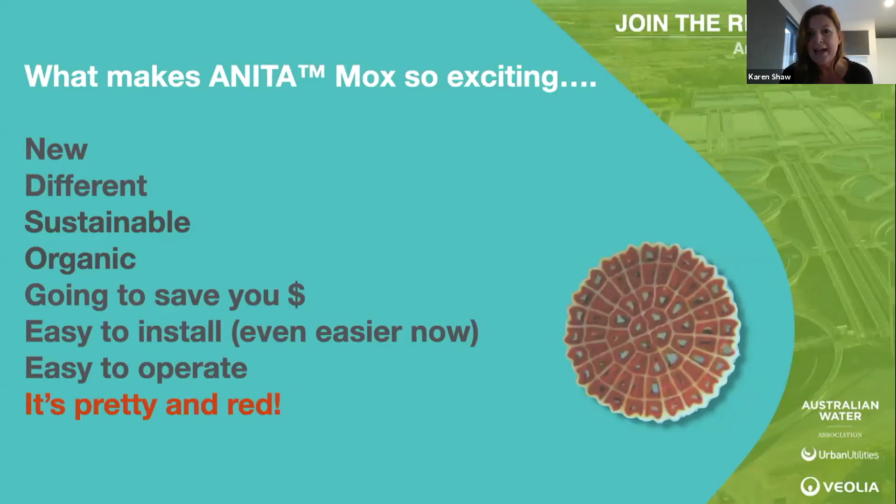Okay, good morning everyone. I'm in Europe, so it's early morning for my part. I'm going to introduce you to the technology. But first, we'll talk a bit about Anammox itself and introduce you to the topic before jumping into the process itself.

So let's start with what is ANITAMox, and before that, which is the Veolia process, what is Anammox in general? If we look at the wastewater treatment plant, we can see a general layout with your water line at the top and then your sludge line at the bottom. What we can see is when we start having digestion, when we want to make use of all the solids generated through your wastewater treatment plant, we generate what we call the side stream after the dewatering. And this side stream is very little flow, 0.5 to 1% of the inlet flow of your plant, but represents 10 to 20% of your nitrogen load, which is significant.

Ammonia concentration is usually quite high, and COD is very low, as we've made biogas out of it in the digester, so the carbon left is little. It's even worse, or more nitrogen, when we add THP, thermal hydrolysis, which is quite popular now in Europe, the US, and also Australia. This will just strengthen the side stream with even more nitrogen return, up to 30% of your inlet nitrogen coming through that side stream.

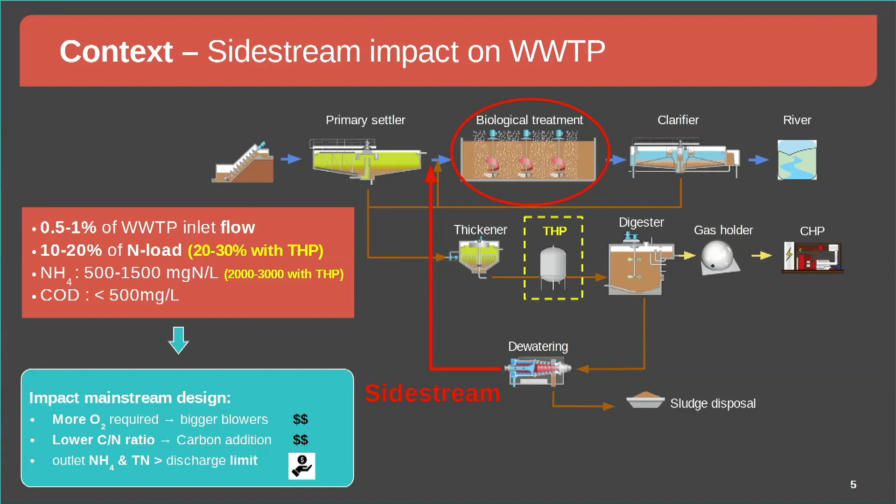The impact of that return is basically, in a biological treatment line, you're going to require more oxygen to nitrify that nitrogen load, so a bigger blower. You're also going to return mostly nitrogen and little COD, so you unbalance your C/N ratio. For the denitrification, you might end up having to add carbon into your system. And then you might put at risk your outlet ammonia and TN discharge limit, and maybe get fined, or not be compliant all the time. That's why we developed this ANITAMox process, to fit into that reject water, that side stream, and to treat nitrogen directly in the stream before it is recycled or returned back to the main plant.

So ANITAMox is the name of the Veolia technology using the Anammox technology.

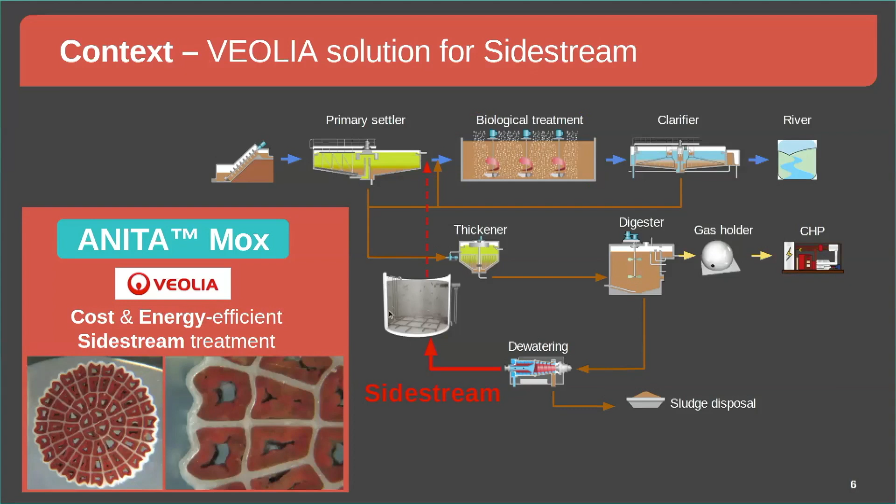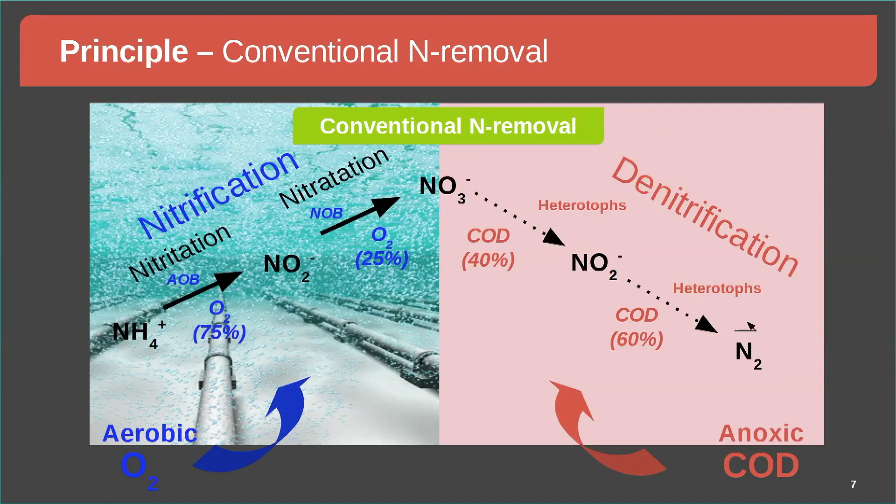With the Anammox, the beauty is we can reduce the oxygen need, and we don't need any carbon, any source of COD. So now we only need to nitrify to nitrite, NO2, not all the way to nitrate, but only a fraction of the ammonia, around 50-55%. Then with the nitrite and the remaining ammonia, the Anammox bacteria will convert that to nitrogen gas through denitrification, with no external carbon required—which is really good for centrate because they don't have any COD. So we can have full nitrogen removal without the need of carbon. It does produce a bit of nitrate, NO3, around 10% stoichiometric, so you will see a bit of nitrate in your plant, produced directly by the Anammox.

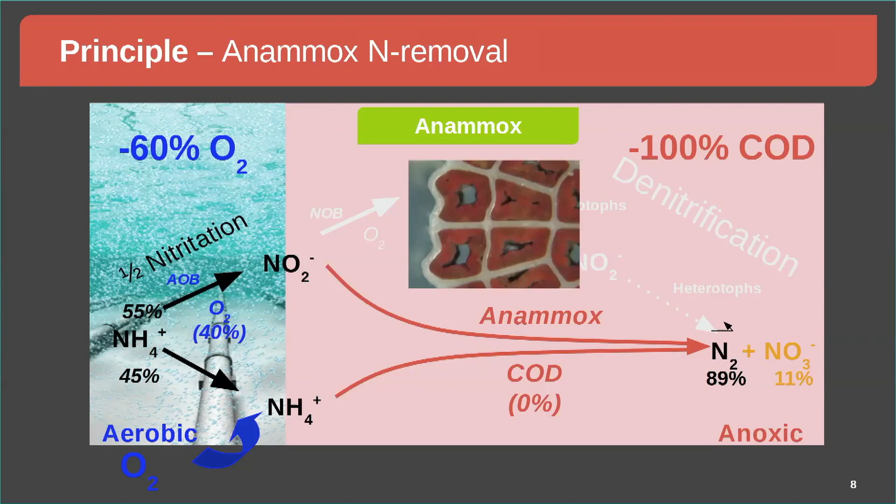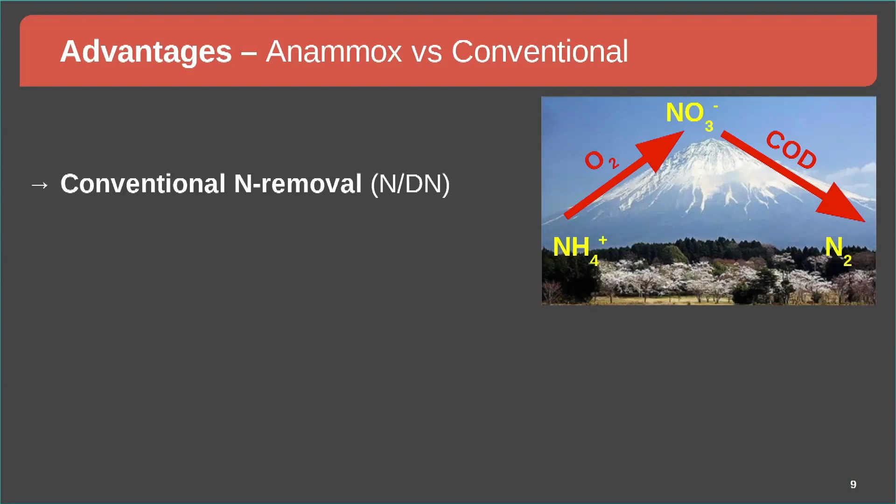To summarize the advantage of Anammox compared to conventional N removal with nitrification and denitrification: conventional N removal is a big slope to climb with oxygen, needing a lot of oxygen to convert all the ammonia to nitrate, then downhill needing a lot of COD to denitrify down to N2. With Anammox it's different—the mountain is smaller, more like Mount Fuji versus Uluru. We need only a tiny bit of oxygen because we only nitrify a portion of the ammonia, and only to nitrite, not all the way to nitrate. Then with the leftover ammonia, we go all the way to N2 with no COD.

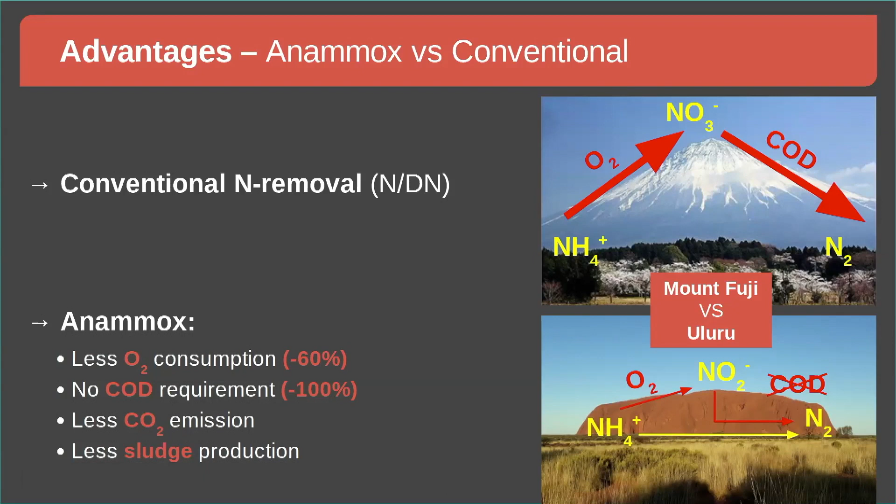So the advantages are: less oxygen consumption, a stoichiometric minus 60% saving, no COD requirement so we don't need to add any carbon, and there's no carbon in that type of centrate. Obviously less CO2 emission since we don't add external carbon, less energy used for aeration, and less sludge production because that bacteria is a slow grower, and we don't use heterotrophic bacteria for denitrification, which produces a lot of sludge.

There's always some challenges, and a reason we haven't seen Anammox before in normal plants. First, it's a very slow grower. If we compare the main populations in a wastewater treatment plant: COD removal is done by heterotrophs with a doubling time of around an hour, a couple hours. For nitrification, the nitrifiers are slow growers—it takes around a day or two to double, based on conditions. For Anammox bacteria, we're talking about a week. So the order of magnitude tells you this bacteria needs the right conditions and the right retention mechanism to stay in the system.

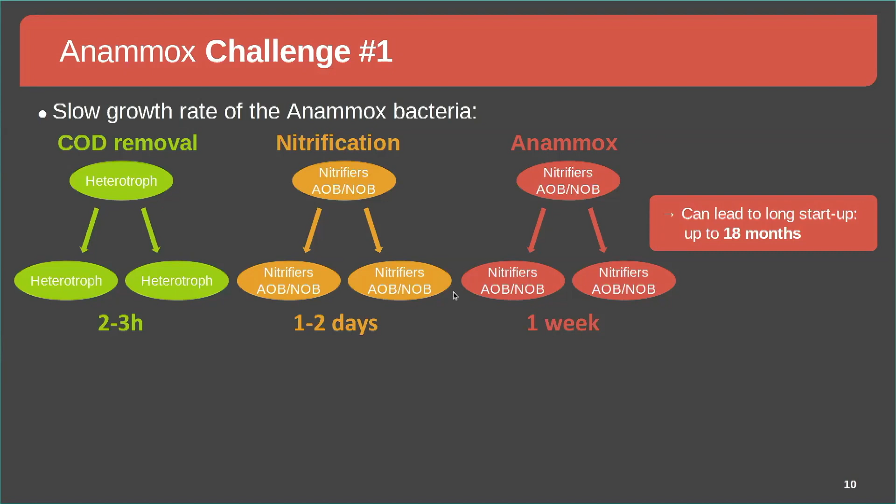This slow growth rate can lead to long startup times. We developed a special strategy at Veolia called BioFarm, where we pre-seed the system with some Anammox so we can start up quicker and get up and running faster. We can reduce the startup time down to 3 to 4 months depending on the project. But keep in mind, these are slow growers, so we need to give the right conditions and the right retention of the bacteria in the system.

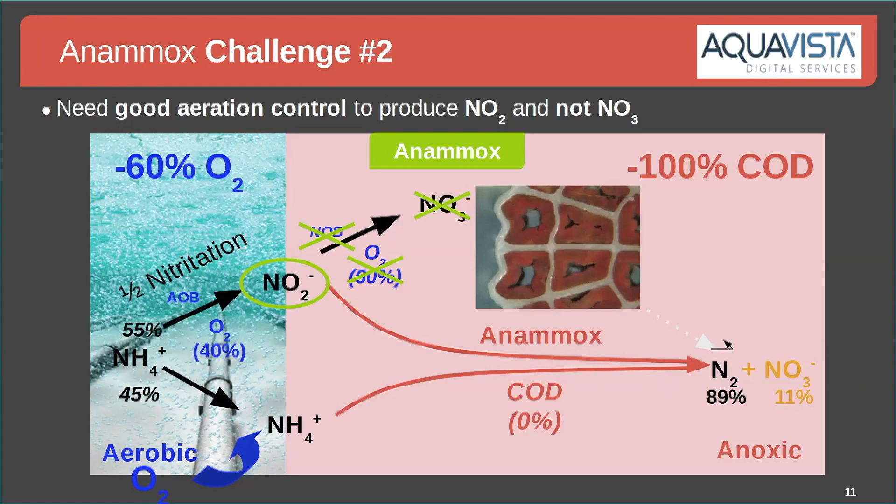Challenge number two with Anammox technology is the key substrate, nitrite, NO2. We need to make sure all or a portion of the ammonia goes to nitrite, but not all the way to nitrate—if it's nitrate, Anammox can't do anything with it. To keep it at the nitrite level, we need to make sure NOB bacteria, which oxidize nitrite to nitrate, are suppressed or their growth is controlled. We need very good aeration control to produce nitrite and not nitrate—that's key for Anammox. We need a bit of aeration for the nitrification stage, but not too much, since Anammox doesn't like oxygen. It's a very sensitive parameter, so we use advanced aeration control through our Aquavista digital services, which allows our Anammox process, the ANITAMox, to mostly produce nitrite and avoid going all the way to nitrate.

So that's the background of the Anammox. Let's jump into the ANITAMox process now, the Veolia process.

It's based on the MBBR technology that some of you might have heard before, moving bed biofilm reactor, from AnoxKaldnes, who are the leader in that technology and part of the Veolia family for many years now, based in Sweden.

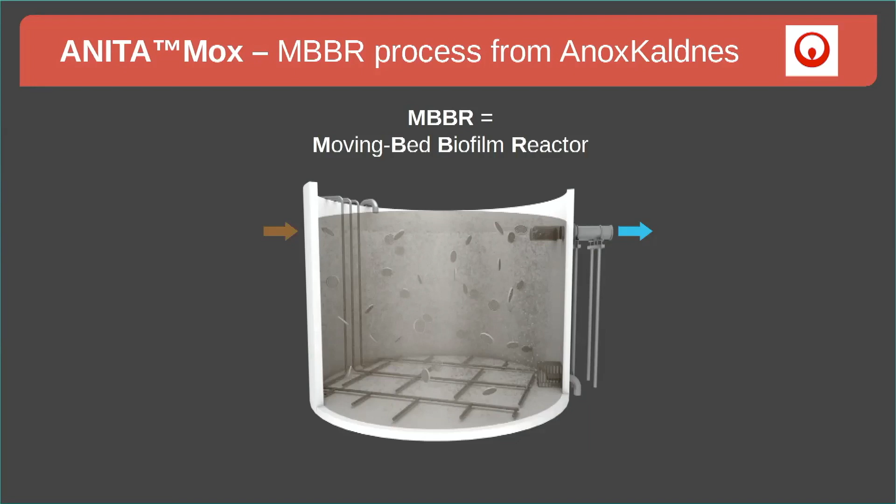The MBBR technology is very basic. One tank, water coming in, coming out, no sludge edge, because we're using a biofilm technology. The key component of MBBR is the media, the plastic media, where the biofilm can grow on different types of media based on the type of project.

You have a sieve to retain the media, the plastic media, but the water can go through in the outlet. It's a physical barrier for the biofilm to stay in the tank. And finally, we have an aeration system, or mixing system when it's anoxic, but in our case we need aeration - stainless steel, robust, coarse bubble, but we can also use fine bubble for some projects and for the ANITAMox as well. Usually it's a robust aeration system.

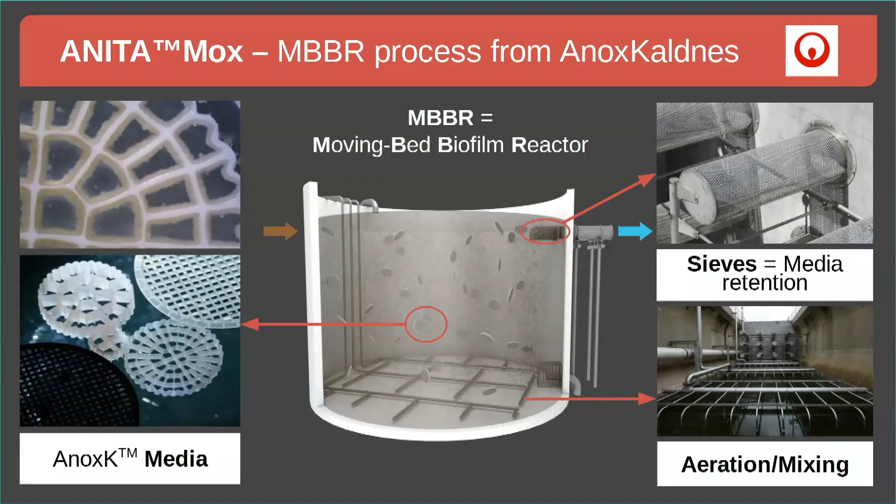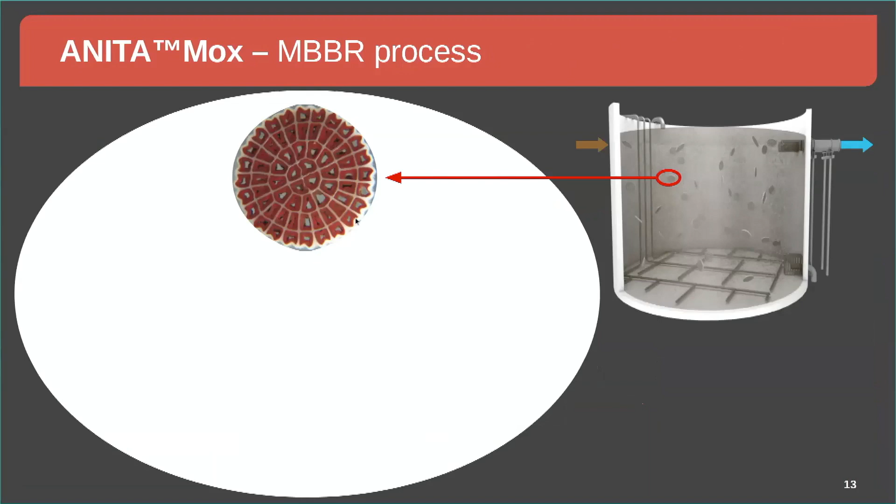Now looking into the detailed mechanism of the ANITAMox. So as I told you, it's an MBBR process, but if we zoom into what happens on the biofilm, you see a picture of a K5 carrier with Anammox bacteria, with that red specific color on it. If we zoom into a little square, here we go: we have the media, the plastic media in dark, then the biofilm growing on top, and the liquid, the bulk liquid, around it.

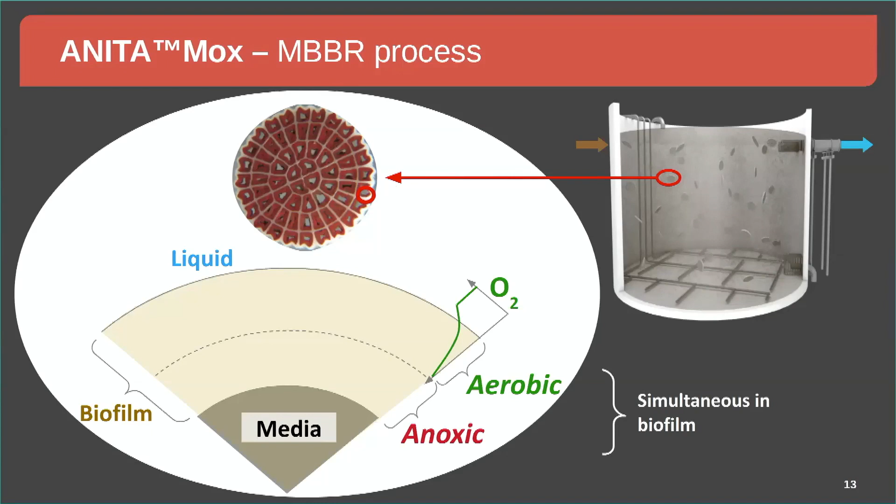If we apply some oxygen gradient, we're going to create simultaneously in the biofilm an aerobic layer on the outer layer of the biofilm, and deep in the biofilm we're going to have anoxic conditions with no oxygen. That's why it's key to control oxygen - we want enough aerobic zone for the nitrification, but not having the oxygen penetrate fully through the biofilm, so we leave that anoxic layer deep in the biofilm for the Anammox.

So what happens after with ammonia? Ammonia in the bulk will diffuse into the biofilm and be used by the nitrification, the AOB bacteria, the nitrifiers, on the outer layer of the biofilm using oxygen. Then the produced nitrite and leftover ammonia will diffuse further into the biofilm, and the Anammox will be located deep inside where oxygen is not present. The Anammox will finish the job, converting nitrite and ammonia into nitrogen gas.

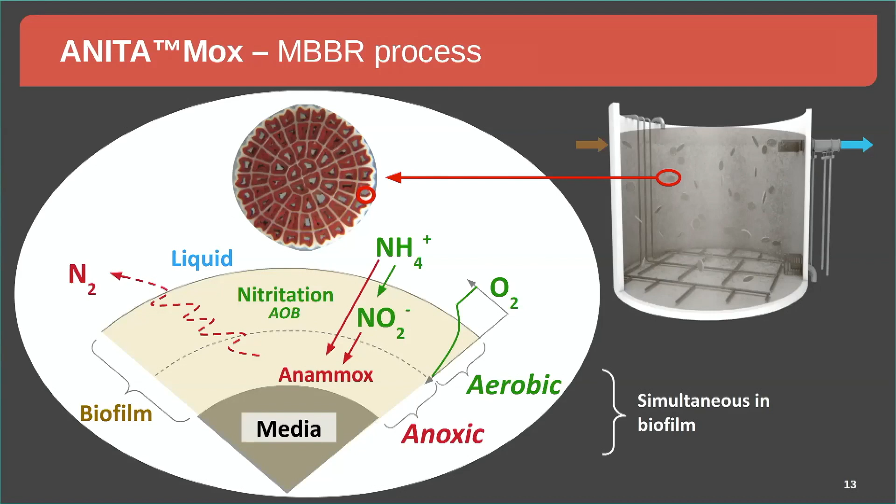So that's what happens in reality in this ANITAMox process on the biofilm - all that happening simultaneously in the biofilm.

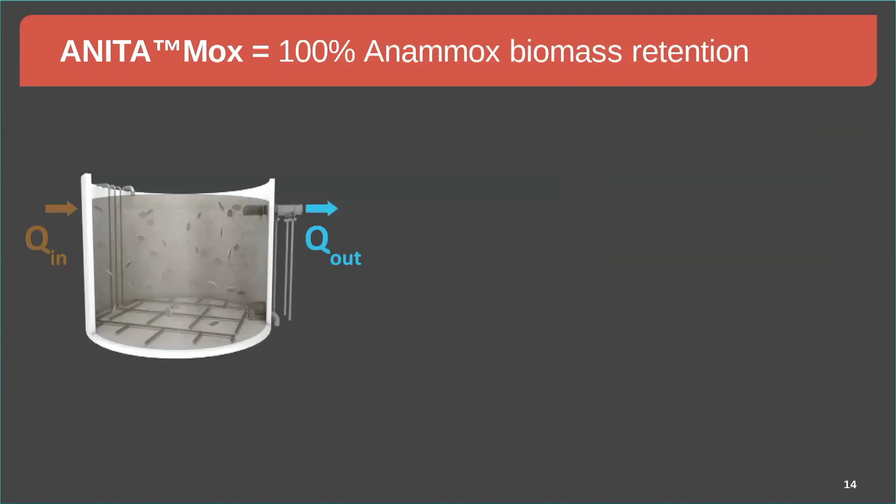Another big advantage of using this technology for the Anammox process is the combination of the media and the sieve, meaning we have no risk of losing the biofilm and the Anammox from the system. This is key, as I told you, it's a very slow grower, so we need to make sure that we retain most of the bacteria in the system and we're not losing the Anammox through the system.

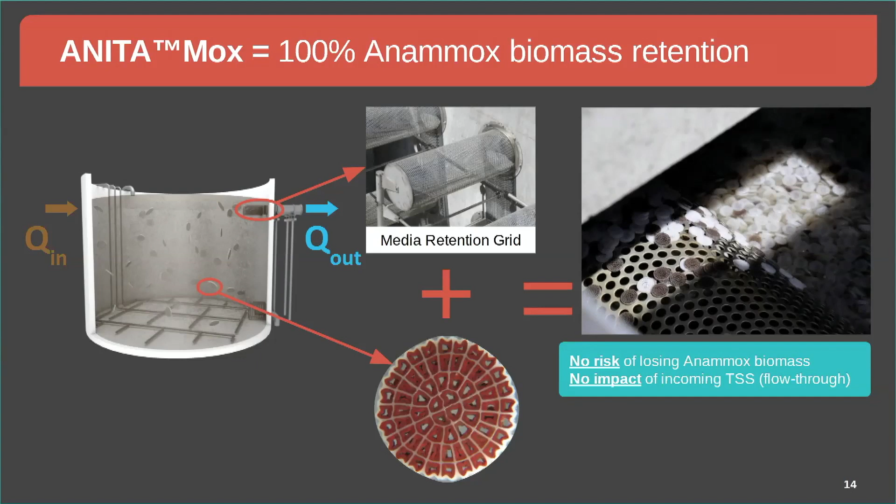The other good thing about that is when you have a lot of TSS coming in, which can happen when we operate a centrifuge on digested sludge. We know all that, but as an operator - and Veolia operates many plants, it's not just a technology provider, it's also a plant operator - sometimes TSS can go very high in a short time period when we start a centrifuge, for example. In the case of the ANITAMox, all the TSS coming in will come out through the sieve, and we have no interference between the TSS and the media. So that's a really good thing when you have a big flush of TSS - it will go through the system nicely.

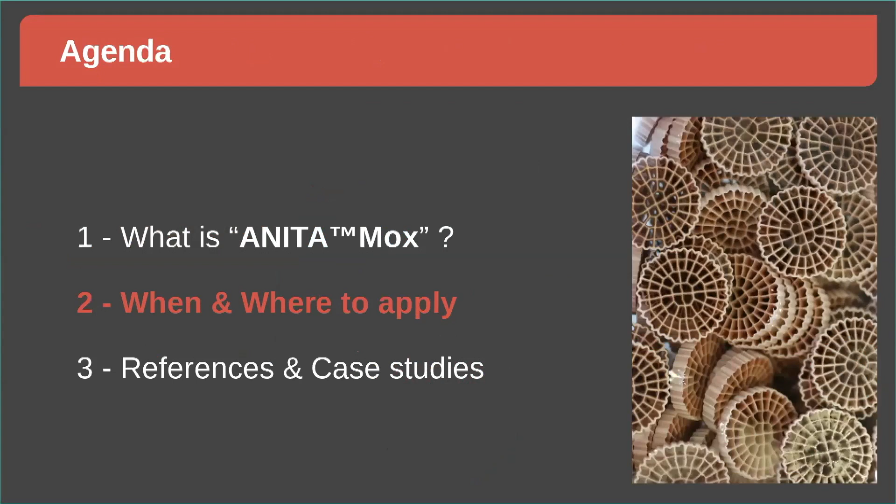So that's the background of the Anammox and the ANITAMox process. Now I'm going to show you when and where to apply this technology, where are the sweet spots.

We've been talking about that MBBR configuration so far, pure MBBR, what's coming, comes out, no sludge recirculation. We are targeting side stream, with SBCOD, a barbarous name, but it's soluble biodegradable COD to ammonia ratio. This is a key parameter to follow in your side stream or reject water or effluent you want to treat with Anammox. If it's relatively low, so we don't have a lot of carbon compared to ammonia,

we use this pure MBBR configuration I've just explained. Conventional anaerobic digester, reject water, no problem. Some industrial effluent as well.

Am I losing the sound or no? Hope you can still hear me. We can still hear you. Yes, Romain. Okay, cool. Sorry, I had a strange noise in my headphone. Just wanted to make sure I was not talking alone.

So some industrial effluent I was telling you, it's compatible with high TSS, as I told you, coming in, very robust and easy to operate. Single tank, what's coming, comes out, and it's most of our references so far.

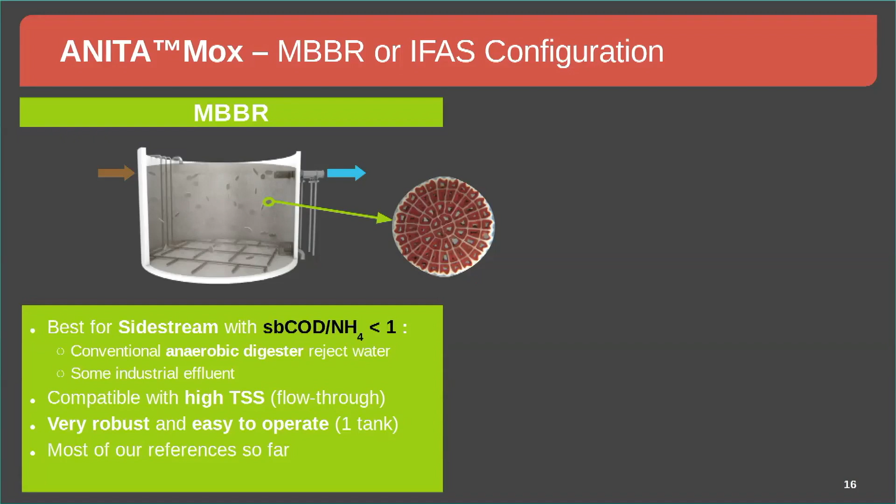We also have an IFAS solution. IFAS is like MBBR, but in the back end, we put a clarifier to return some of the sludge. At the end, we have a mixed hybrid system with media in the tank, but also some suspended sludge, normal activated sludge, which is recycled. So we have a mixture of suspended sludge and the biofilm with the Anammox.

We use this hybrid configuration when this soluble COD to N ratio is higher, when your side stream's got more carbon than usual. Typically we use this configuration when you have a THP, thermal hydrolysis process, as a pretreatment before your digester, because you usually have more VFA, more COD coming out from the digestion. Also for co-digestion systems, when we have a lot of different waste, not just municipal sludge, we use this IFAS configuration.

So it is a bit more impacted by TSS coming in. We need to be a bit more careful on how we operate the centrifuge or the dewatering, because now we recycle the sludge. If we have a lot of sludge coming in, TSS, then it will accumulate in the system. But it's more compact than the MBBR version. So if we have a problem of footprint or reusing a small tank, sometimes we can go for IFAS instead of MBBR.

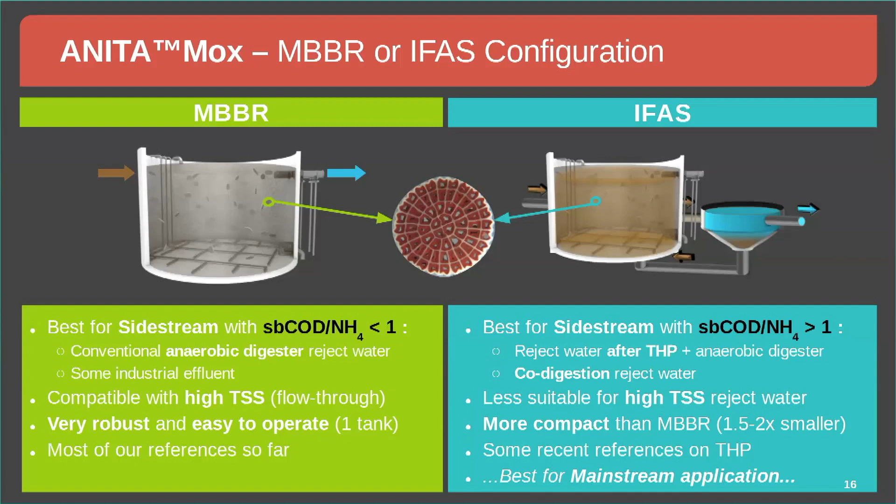So a little slide, not just to highlight the THP reject water, because it's quite specific, and it's been reported that it can be inhibitory. It's a challenging type of reject water to treat when we have THP.

Just to highlight the risk mitigation and how we address the risk with the ANITAMox. The main risk that people know when treating THP with the Anammox system is inhibition of the AOB, the nitrifier, and the Anammox, due to the specificity of this thermal hydrolysis pretreatment. We also have a negative impact of some refractory COD, or some biodegradable COD like VFA, which is higher in that type of centrate, on the Anammox development. So we have a competition between the Anammox and the normal heterotroph bacteria. This can lead to the loss of the Anammox from the system.

So we need to have something which retains the Anammox well. And we can have a bit higher risk also of development of the unwanted nitrifier, the one going from nitrite all the way to nitrate. So these are the four main risks when we are dealing with THP.

So now to show you what we have for those risks as a contingency with the ANITAMox. For inhibition, we always provide flexible extra dilution capacity, up to 2 volumes of dilution for 1 volume of centrate. Usually we are at 1:1 or 1.5 to 1. We can go up to 2 if there is a problem of inhibition.

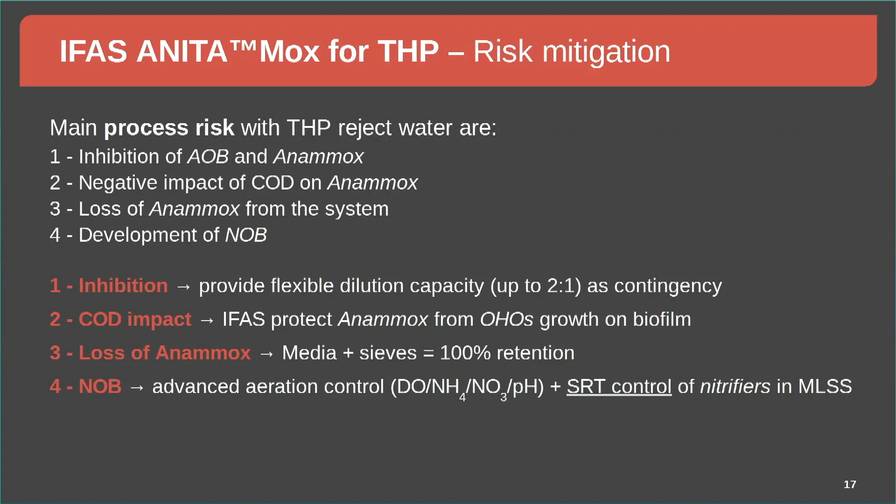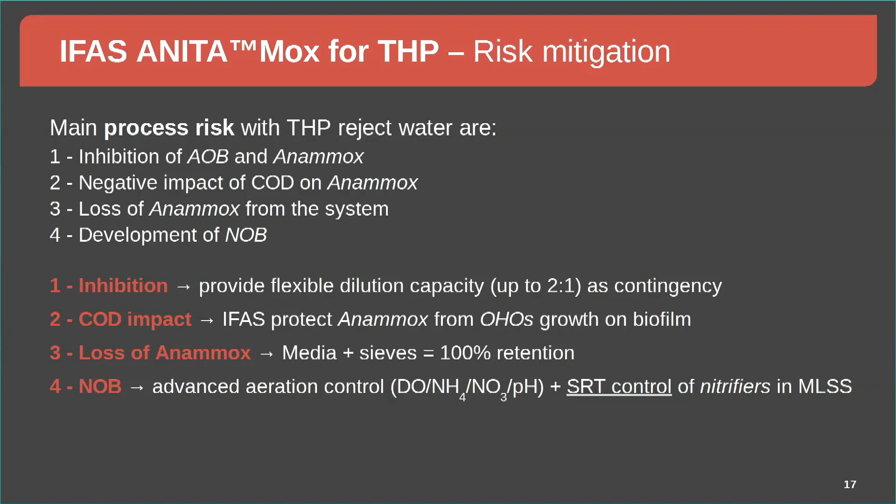And for the NOB, to control the NOB, we have an advanced control aeration system using DO, online ammonia, online nitrate, and online pH, with all the set points being adjusted based on the performance of the system. When you use IFAS configuration, an extra knob to control the NOBs is the SRT, the sludge age of the bulk liquid. We can control that with the IFAS configuration to make sure the NOBs are not growing too much in the system.

So to conclude on THP, just keep in mind that Veolia is not just an AnammoX provider technology, but it's also the only AnammoX provider technology which has a lot of experience with THP. More than 20 years, we've developed our own THP processes called Biothelys and Exelys. We are operating many THP plants, and that expertise has been put into the ANITAMox to make sure that we know how to deal with this difficult centrate at times.

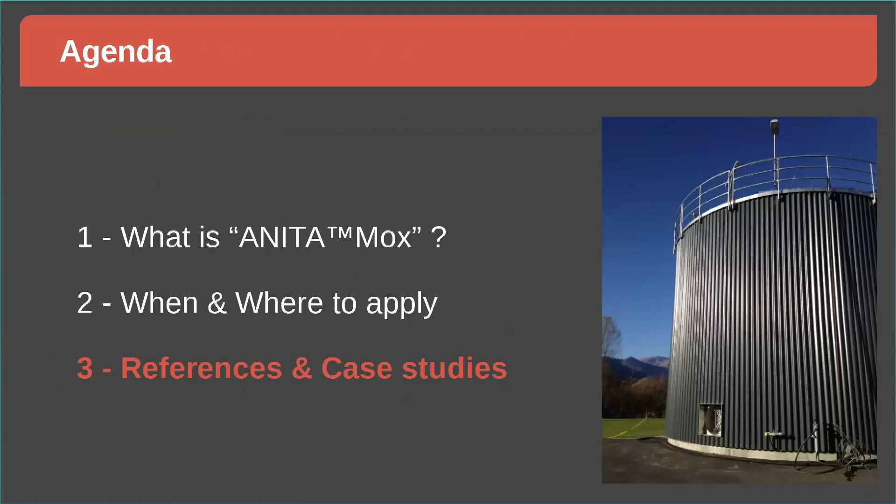So finally, before leaving the floor to Justin to talk to you about the Luggage Point project with the ANITAMox, a few other references and case studies worldwide. This is the reference list. Don't spend too much time reading it, but in green you have the ones which are already in operation, up and running, starting in 2010 for the first one in Sweden.

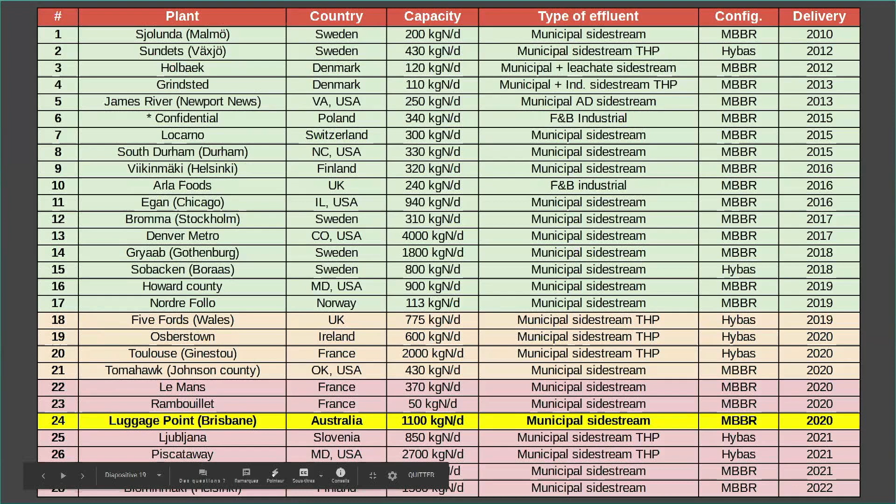In gray, or sorry, in orange in the middle, four which are currently under startup. And in red, the last six, they are the ones which are in design phase or will be starting up later on. We can see in yellow the one in Australia, in Brisbane, at Luggage Point. Mostly municipal, a few industrial references as well, and most in MBBR configuration, but some also in IFAS configuration.

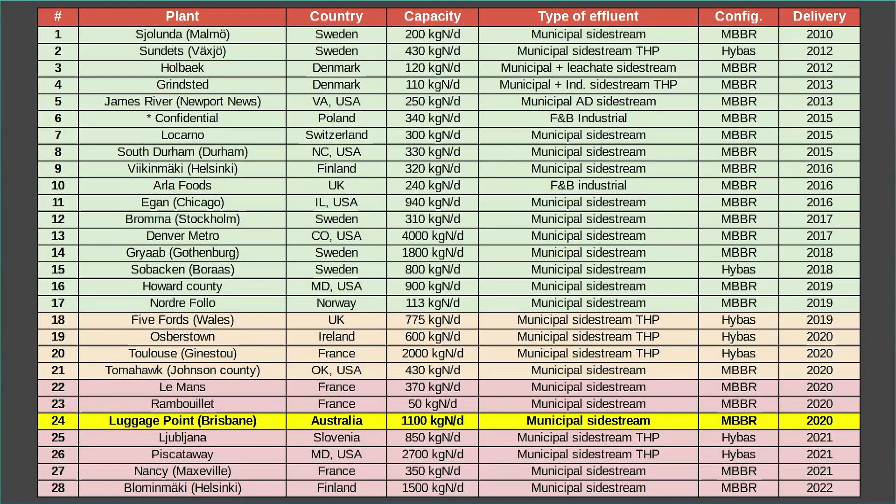If we look at where it's located worldwide, mostly in Europe, 20 plants are in Europe, 5 in Sweden with our colleagues at AnoxKaldnes, 4 in France, then a bit scattered all over Europe. It's been really successful in the US as well. So AnammoX crossed over the Atlantic to the US, and it's a very mature technology over there, and all the utilities in the US are embracing the AnammoX technology.

So we have 7 references in the US, and now AnammoX has lately been doing its longer journey to Australia and to Brisbane. So that's been really exciting actually to be there now.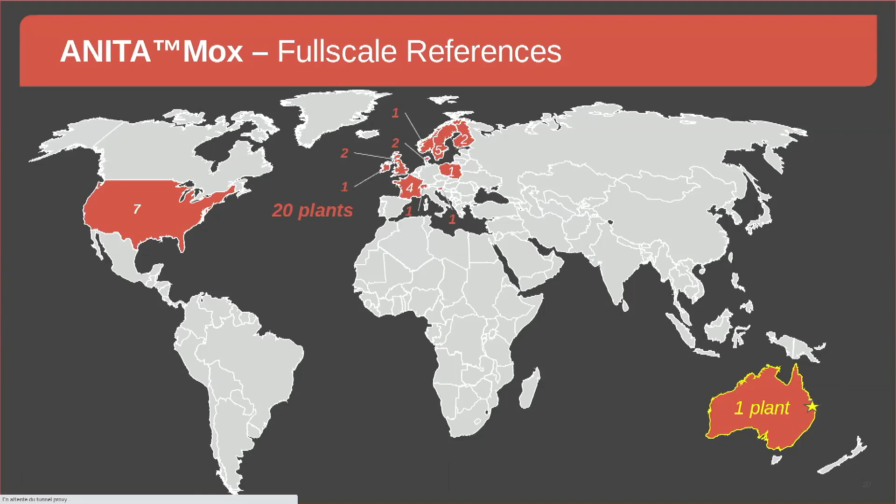So Denver, just a few shots of some of the references. In Denver, it's the biggest ANITAMox so far, treating 4 tons of nitrogen per day. So it's a very big plant in Denver, about 2 million PE. And you see the photo shot of that plant, and the ANITAMox is basically reusing some of the existing tank, just at the bottom here.

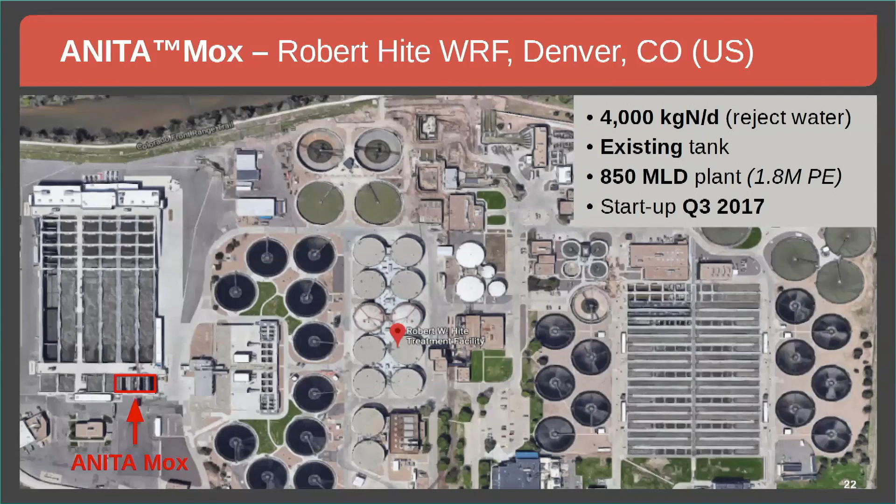The MBBR technology is very good for retrofitting existing tankage you can have on site. We just need a basin of whatever geometric shape, basically. So if we look at Denver, that's how it looks like. A few Photoshop images of the plant we retrofitted. You see the empty plant with the sieve, which was located, the aeration grid, and some mixers.

Two side-by-side reactors. The only specificity of this project is that alkalinity was low, much lower than normal centrate, because they're using ferric to dewater. So we have some consumption of alkalinity, meaning that without dosing extra alkalinity, which we don't have in most reject water, but in that plant because it's limiting, we can't reach more than 75% ammonia removal, and the ammonia in the outlet stays relatively high, around 250, 300 for this project.

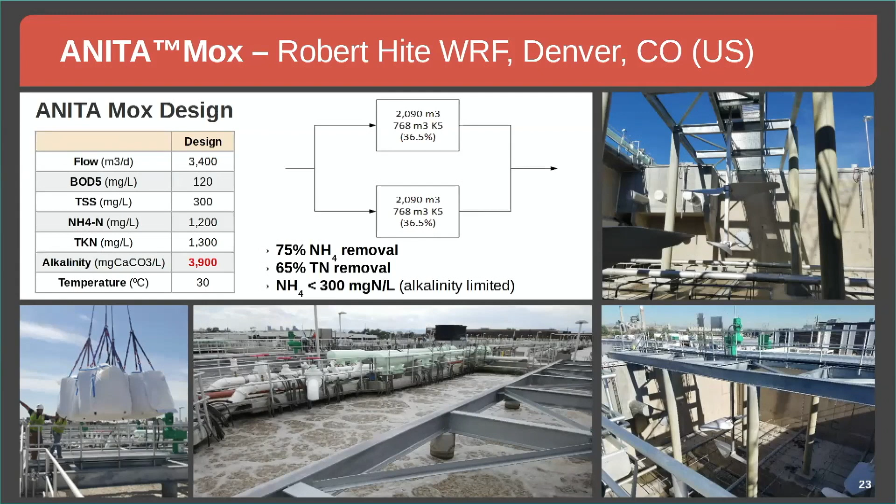If we look at this graph from the client, from the operator: in blue you have the load, so you see the ramp up over 3 months time. But in 3 months time, we've been able to start treating the design load of 4 tons per day by putting only 5% of the media which were seeded with AnammoX. So it was a very quick startup for an Anammox process.

So in blue we can see now we are at the design load, and in red it's the ammonia in the outlet, and we can see that we are quite high, much higher than what we usually see, around 100 to 150. But it is due to the lack of alkalinity. It's okay for the client to be around that level. They don't want to dose any extra alkalinity, so we do with what we have.

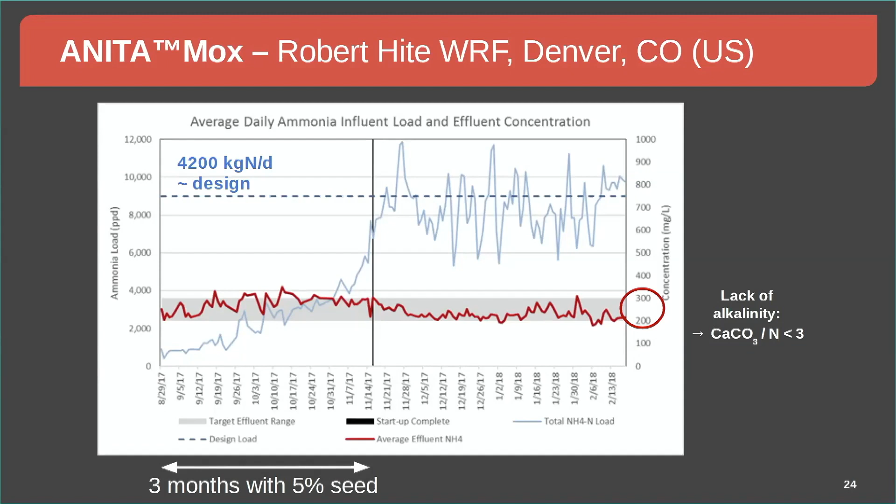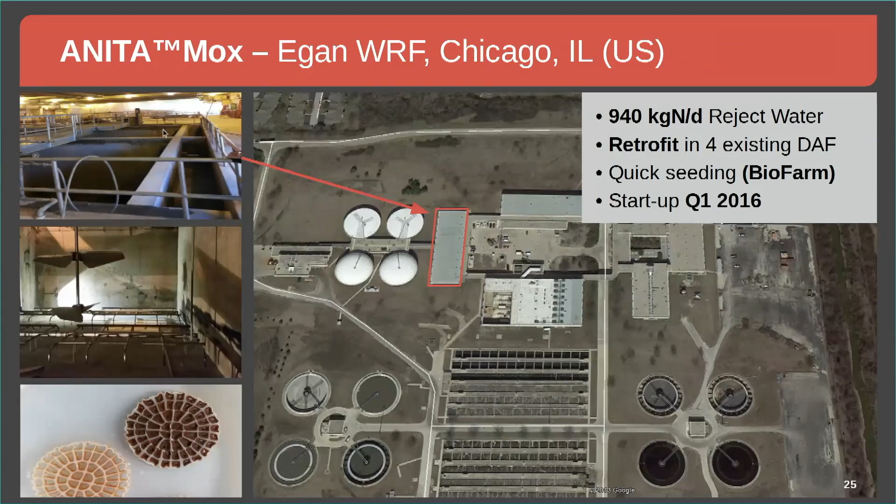Again, in Chicago, again, retrofit of existing tankage. This time, it was unused DAF, so we retrofitted 4 DAF into AnitaMox. You can see some photos there.

The good thing about this EGAN plant is you see the load in blue, the ramp up. We start the ramp up, and after 1 month the client says, sorry, I've got a problem with my digester, we have to shut down everything. We have to put the digester into maintenance and do some operation. So basically we had almost no flow for 8 months, nothing.

But the bacteria, the Anammox, the seed were there. And when we restarted after 8 months, the ramp up was really quick again to reach the design load of around 1,000 kilograms per day. Those Anammox are very resilient. Once they're on the media, they can stay there happily, and we've stored them for more than 2 years. When we restart, the activity is still there. So it's very resilient once you have the Anammox on the media. You can see in the graph the ammonia removal being around 85 to 90% on that plant.

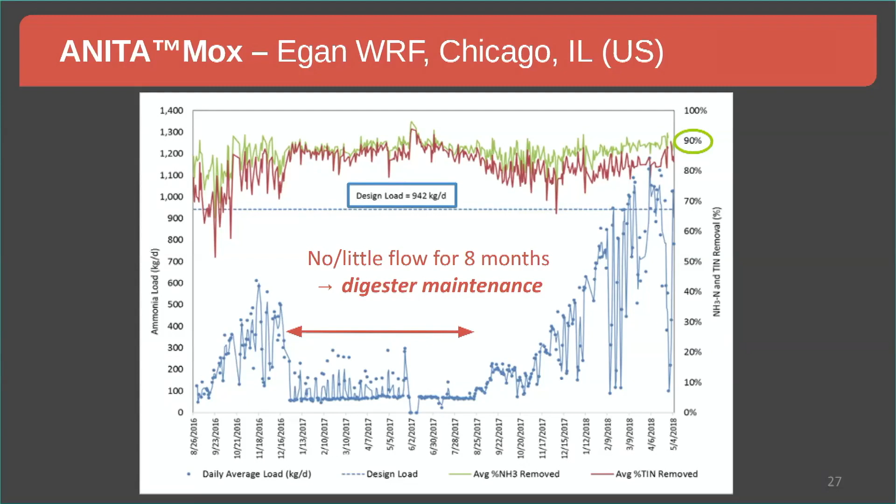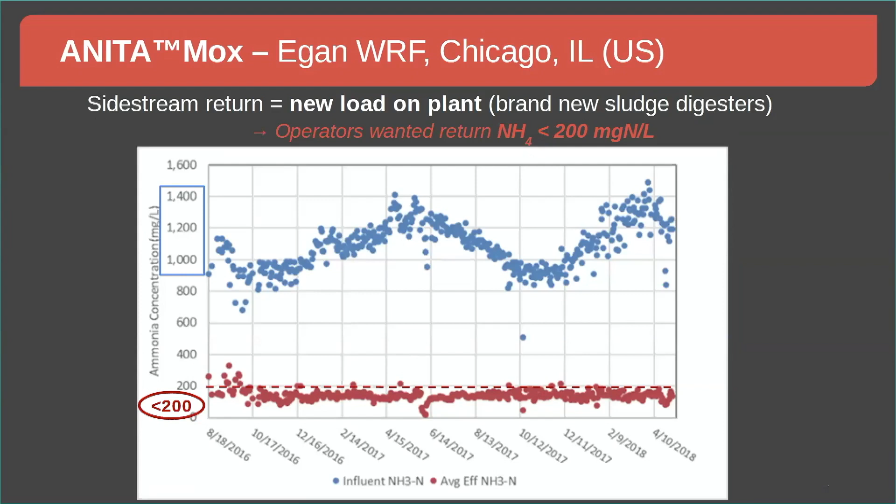Again, same plant, you see the ammonia level coming in, fluctuating between 1,000 and 1,400 milligrams per liter. And we're always below 200, which is what the operator wanted in return, less than 200 ammonia, which has been the case for more than 4 years now.

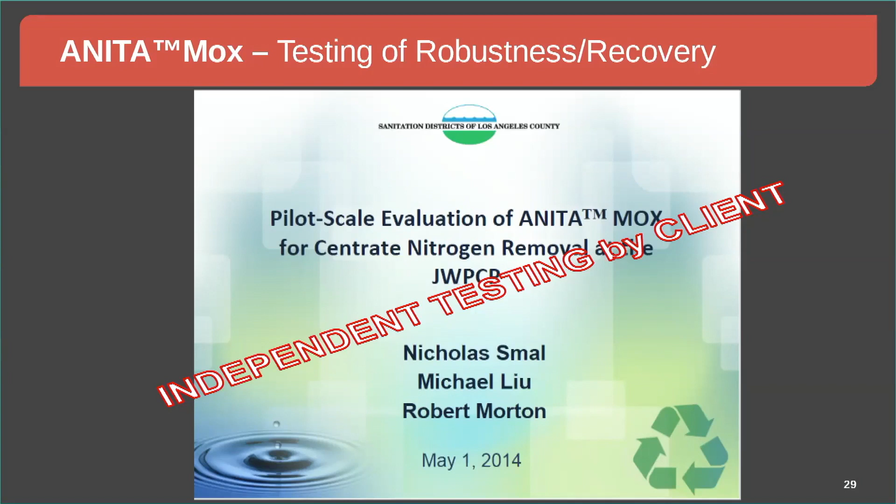I will show you very quickly an independent study. You can find all the paper on that by Los Angeles County, the municipality. They've been testing an ANITAMox pilot for more than 2 years for their big plant, one of the biggest in the US, the Joint Water Pollution Control Plant.

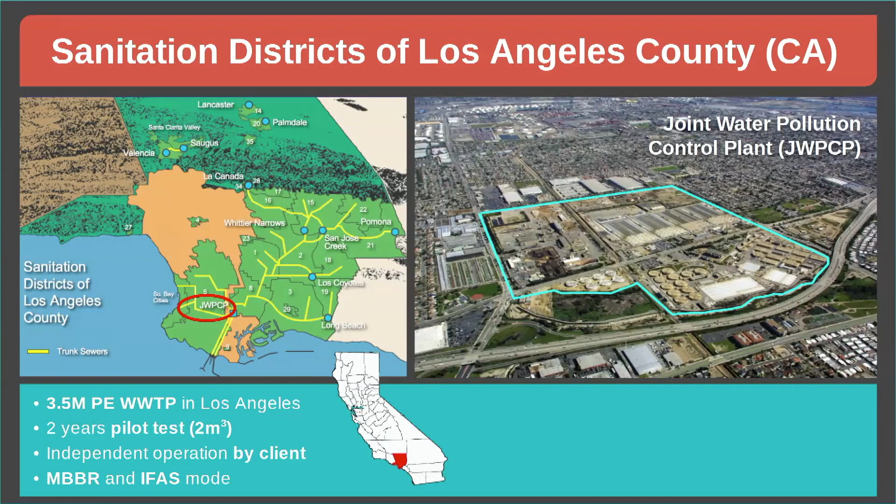It's a 3.5 million PE plant. They don't have a nitrogen content limit at the moment in California, but it will come into force in a couple of years. So they are already testing technology which could reduce the nitrogen to treat on the main plant. They have existing digesters, so they wanted to test a pilot, both in MBBR and IFAS version, for more than 2 years.

And what they've been testing at the end of that period is what we call robustness testing. You see 6 scenarios. What they wanted to do is disturb the system with scenarios like power shutdown, no electricity for 24 hours, no feed, like you've got a problem with the feed, or no centrate available, or overfeeding by 100% more for 24 hours.

What happened with no aeration, over aeration? We know aeration is a critical parameter. What happens if the control system of the aeration goes berserk and you get way more air than you actually require? And also trying excess polymer - we know that polymer can be a bit fuzzy sometimes when you have too much, for the nitrification and even the Anammox, and on the oxygen transfer as well.

So they tested all that. What they did is apply that event, shown at the bottom in yellow, for 24 hours, and then measured the recovery time to go back to the same performance as before the event. For each scenario, the recovery time was around 8 hours, so very short, up to 1 day, or a day and a half, to get back to what it was.

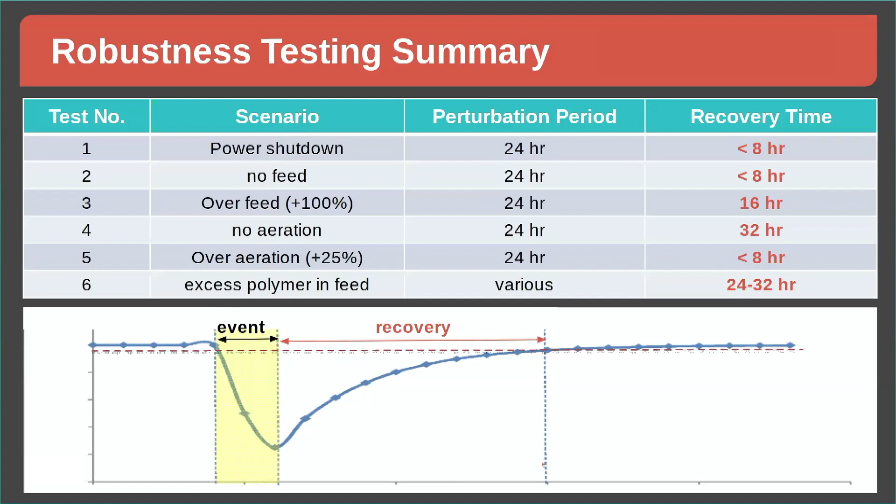The more problematic cases are when you have no aeration at all for 24 hours, or when you have a lot of excess polymer, which can take a bit more time to recover. But basically it shows the robustness of the system through what we all know will happen in the normal life of a plant - some few hiccups along the path.

Second to last reference to show you THP - that's one of the first ANITAMox plants in Sweden, in Växjö. What I want to show on that plant is that we retrofitted a very shallow tank first, an existing SBR dosing methanol for reject water, and we revamped that tank, keeping the fine bubble diffusers, into an ANITAMox. It started in January 2012, but then in 2015 the client wanted to install THP, which he did, and basically it was the first Anammox system treating THP, and it's been the case for more than 6 years now.

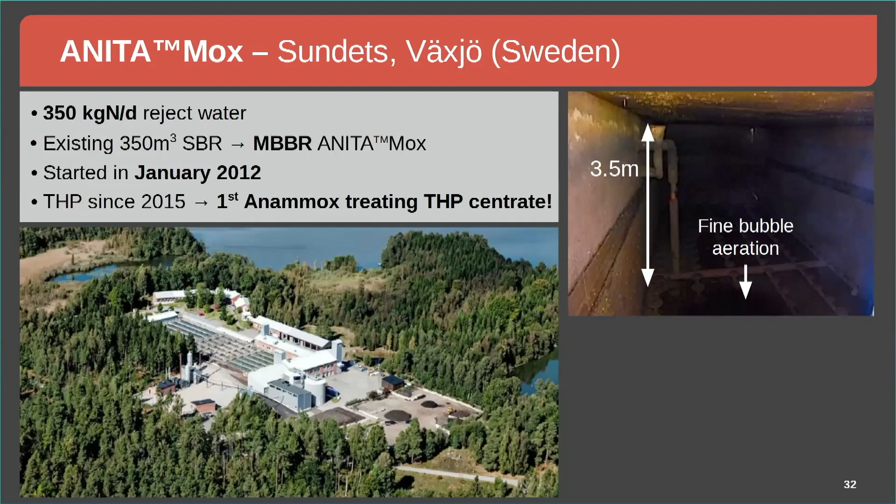It was actually late 2014. It was MBBR - as I told you, it's better to have IFAS. So for 3 years the system was treating THP with the normal MBBR configuration. Then in late 2018, or May 2018, we converted the system into IFAS by just adding one of those small clarifiers that the client had laying around, a stainless steel 5 square meter clarifier, to be able to operate this as an IFAS, which is better when you have THP. I will show you the results in a minute.

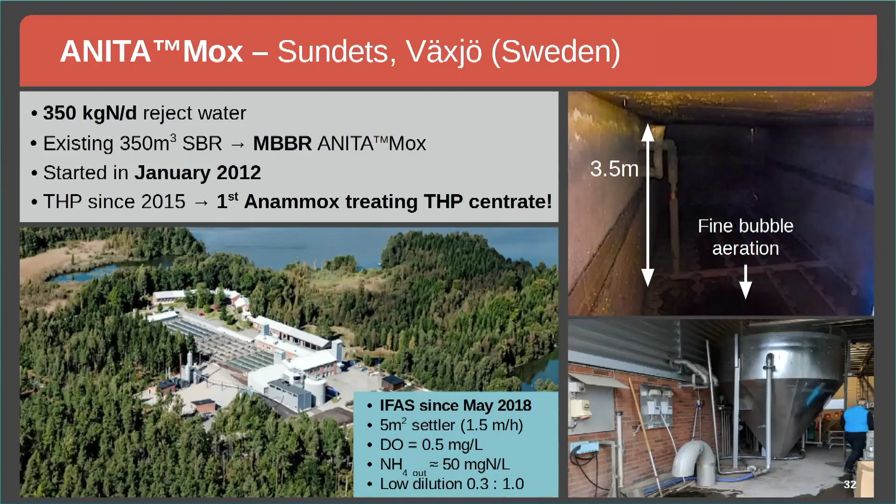So this is the pre-THP, normal sidestream, treating around 140 kilogram N. The client didn't have the full load on his plant at that time. In black, you have the ammonia coming in around 1,000, but fluctuating a bit, and in red the ammonia coming out. On average it was around 90 milligram per liter, so quite low, for more than 3 years.

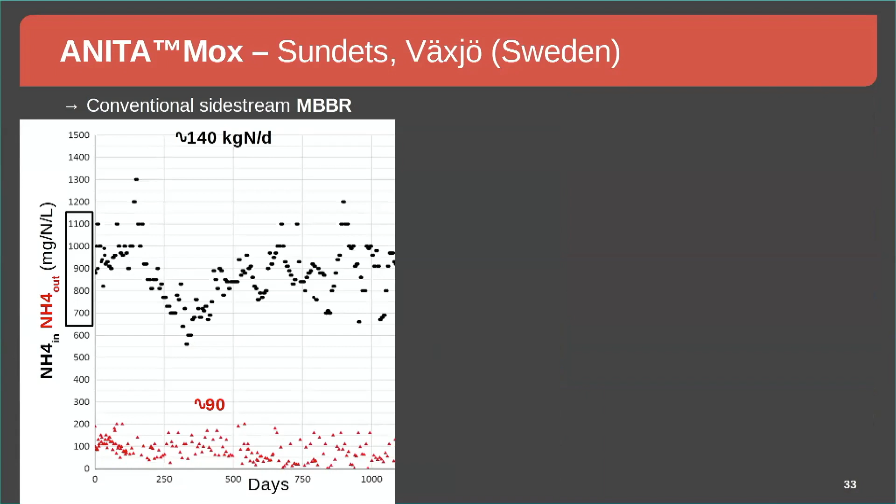Then he added THP, and we kept the MBBR configuration because at the start we didn't know that the client would put THP, so it was MBBR ANITAMox. We had to do 40% dilution, almost 1-to-1 in volume. We're treating a bit more, 160 kilogram N per day, like all the centrate produced, but the residual ammonia in the effluent was around 160, a bit higher. At the start we had a few hiccups, as THP can be a bit problematic at the start.

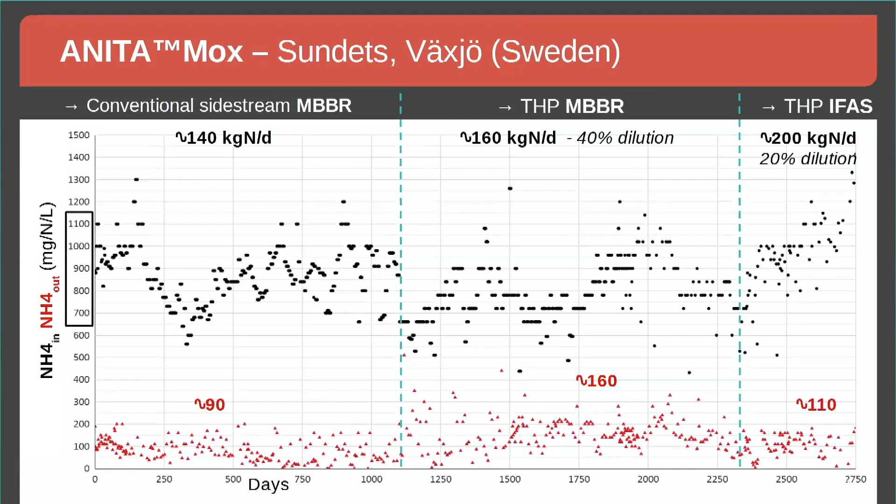It did work in MBBR, but we were a bit higher and it was more sensitive. Then we decided in 2018 to switch to IFAS, and we could increase the load and reduce the dilution, down to only 20% dilution required. And the ammonia in the outlet was low as well, around 100. So that was the first ANITAMox treating THP.

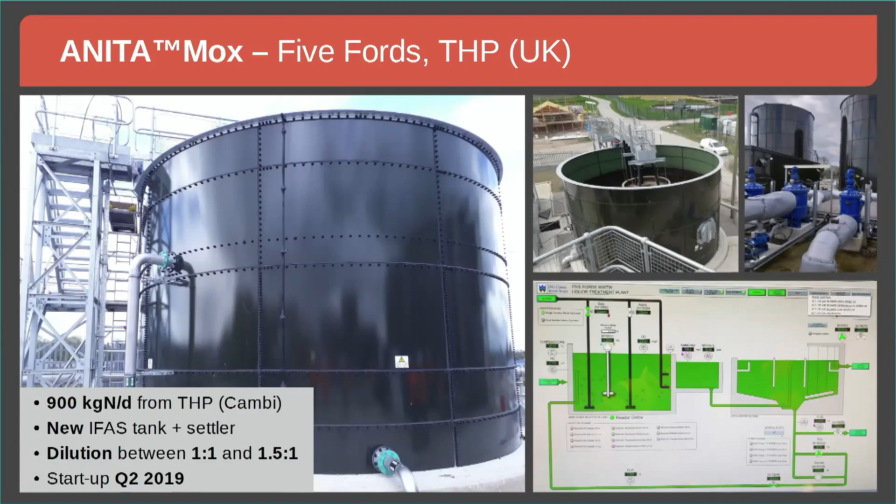The one which is just finishing commissioning now on THP is in Five Fords in the UK, with Welsh Water. It's almost a ton of ammonia per day, and it's brand new tankage. You can see the big photo, and a brand new clarifier on the photo there. Starting up late last year.

As you can see here, in black is the ammonia coming in, in blue is the ammonia coming out, and in red is the ammonia removal percentage. Around 1,000 coming in, and the dotted line, so after 150 days we treated all the centrate which was available. So we had this ramp up period to colonize the virgin media with the seed we put in, and then we were able to treat.

So we don't have the design load yet. We have 700 now, 750 as we speak. The design is 900, but we are treating everything which is produced, and we are around 80 to 85 and 80 to 90% ammonia removal. So that's it for me.

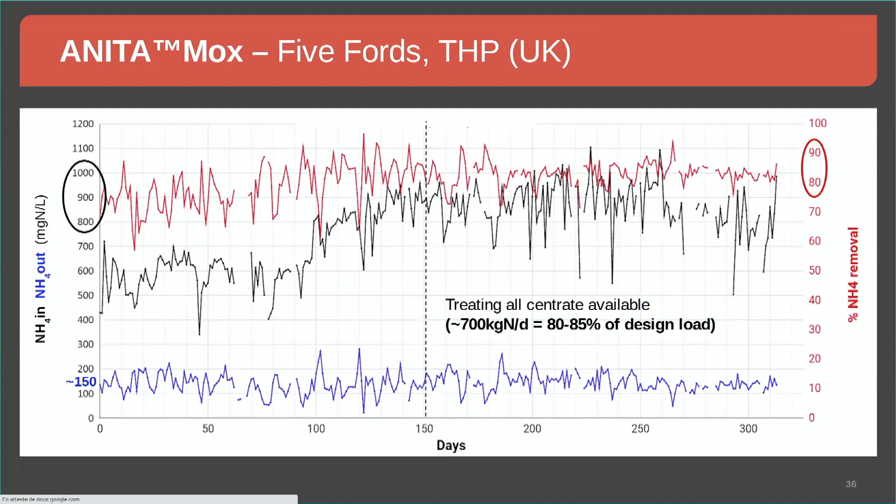To conclude, ANITAMox is the Veolia Anammox process, either in MBBR or IFAS configuration. It's a biofilm system, so we don't rely on any settability or density of granule or whatever. It's robust, and we have ultimate 100% of the Anammox retention in the system using MBBR and IFAS. So it's different from most of our competitors, which are using granules or density to separate the Anammox from the other sludge.

For the side stream application, it's a very mature technology now, even if it's new for the Australian market. More than 25 references and more than 150 Anammox systems worldwide, not just our Veolia one, but all the other processes. So it's very mature, a lot in the US, in Europe, starting in China, in Asia, and now in Australia, mostly for municipal centrate. But we can also use it for THP when there's a THP pretreatment before that, and in that case we use IFAS. Also for industrial effluent, when you have to remove ammonia and you don't have a lot of carbon in your industrial effluent. Simple and robust, I talked about that already.

And just a little pitch about mainstream activity. We have been piloting a lot on mainstream application, so how to treat with Anammox on the mainstream water line, not just the reject water from the digester. It is working on the pilot level. We are looking for demo projects now in Europe and in the US for industrialization. We know it's the way forward to be energy neutral, because with that we can divert all the COD into the digester. We don't need to keep some COD for the denitrification, as this will be taken care of by the Anammox without using any COD. So that's really where we can be fully energy neutral, with no co-waste, without putting extra waste into your digester. You can be energy neutral with the mainstream application on the Anammox. Lower OPEX and lower carbon footprint.

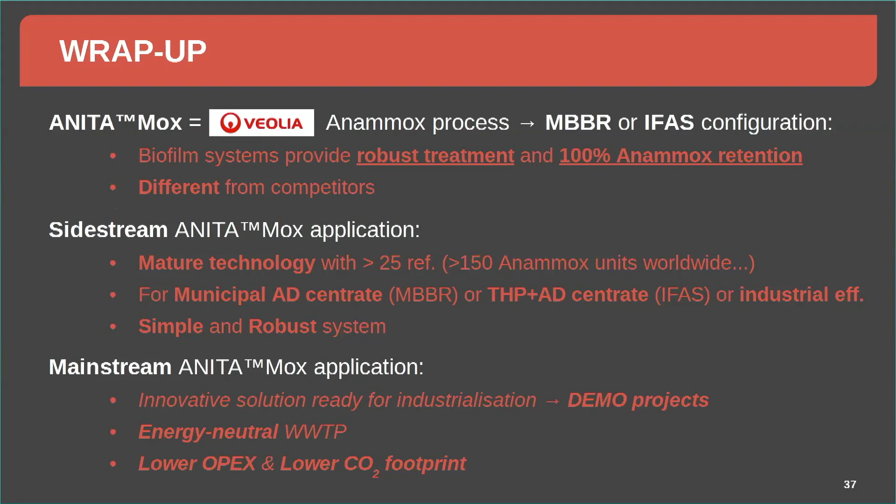My presentation today will talk a little bit about our journey along the path to full-scale Anammox at Luggage Point, some of the success we've had so far, and also some of the success we hope to achieve from its implementation.

Just a quick overview of the presentation. First, I'll talk about some of the key drivers around the selection or choice of this innovative technology, followed by some of the current performance of our plants, a bit more about the treatment strategy at our largest treatment plant, Luggage Point, and finally the upcoming project of the Anammox at Luggage Point.

So who are we? Urban Utilities was formed in 2010, following the merger of 5 councils, and we provide water and sewage services to about 1.4 million residents. We currently own and operate 28 treatment plants across 5 separate councils, with the majority falling within the Brisbane River catchment, and the effluent from a lot of our plants ends up within the Moreton Bay region.

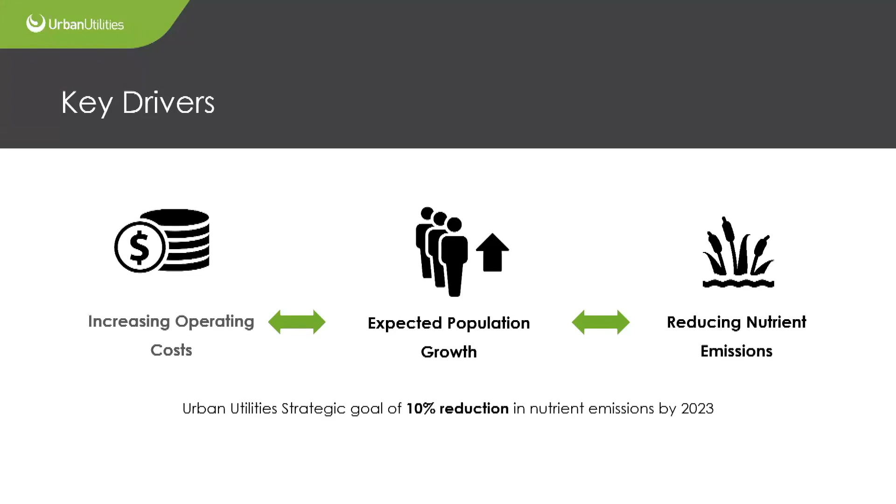Introduced in 2016, the bubble licence was the first of its kind for the Lower Brisbane River catchment. Compared to traditional effluent limits for individual STPs, the permit allows Urban Utilities to operate 9 of its treatment plants under a combined annual mass load of total nitrogen and phosphorus. These 9 treatment plants discharge within the Brisbane River catchment into Moreton Bay.

The implementation of the bubble licence has since presented both a risk and an opportunity to achieve greater emissions reductions by shifting our attention from smaller, more costly treatment plants to focusing on the performance of larger treatment plants.

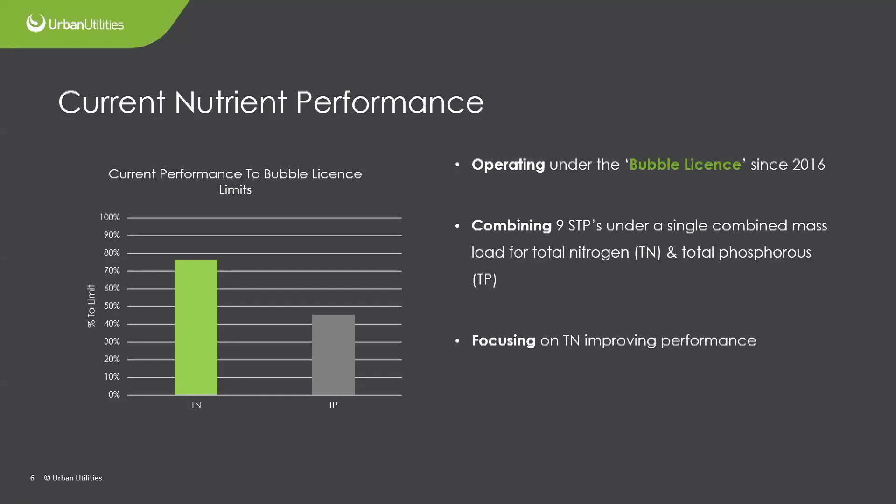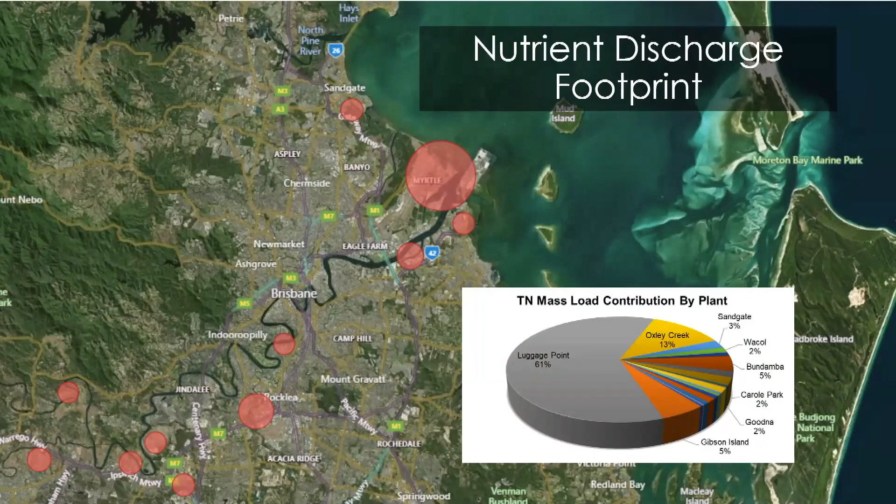As you can see, under the bubble licence, our largest treatment plant, Luggage Point, contributes significantly to the total nitrogen mass load, and so its performance heavily influences our ability to meet our regulatory limits and achieve our strategic goals. Whilst there have been opportunities and we're working towards optimising the performance of our plant, with increased catchment growth these optimisation works really end up in diminishing returns, and so there's still a shortfall against our strategic target of a 10% reduction by 2023.

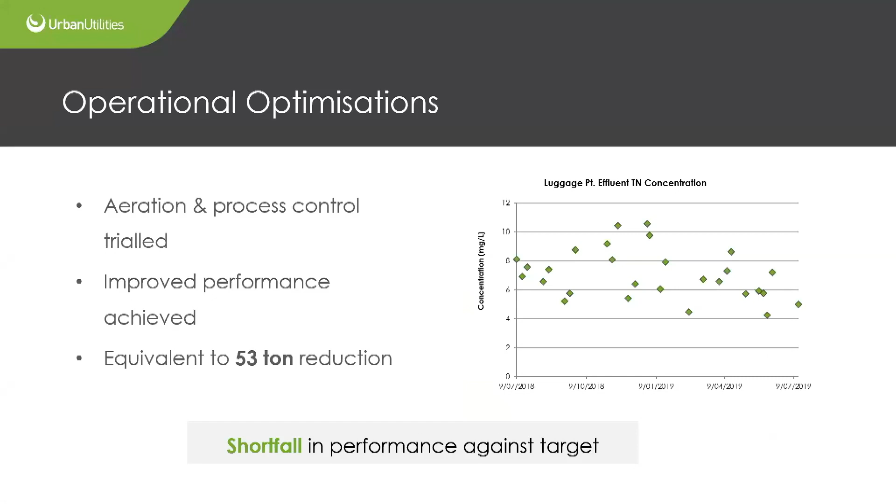As I mentioned, Luggage Point is our largest municipal treatment facility. It treats flows based on an equivalent population of about 750,000 people. Being the largest of the 9 treatment plants within that bubble licence, it contributes significantly to the overall TN mass load, and the population within the area is expected to increase significantly to about 900,000 EP by 2041.

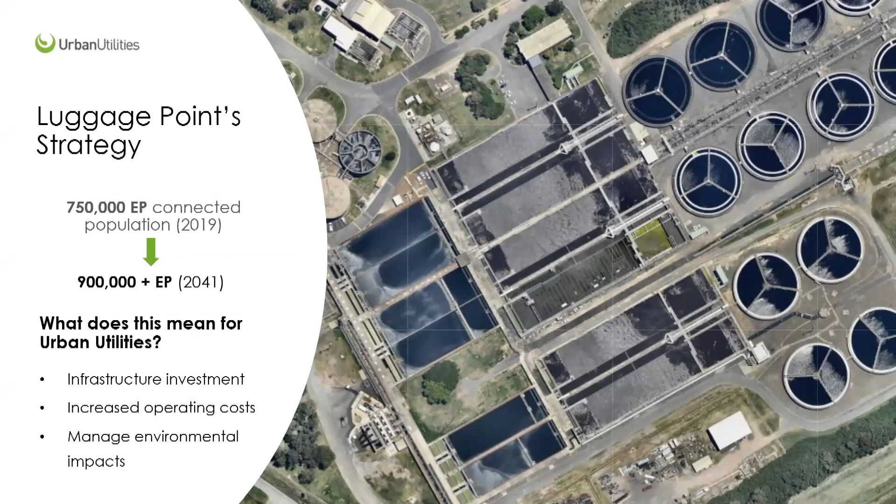Whilst there are options to meet these effluent targets through significant capital and operational investment, most of these traditional options conflict with our strategies of sustainable treatment due to the increased cost to the customer. So Urban Utilities conducted an option assessment, and we identified the opportunity to significantly reduce the TN, or nitrogen, load to the mainstream process by treating the side stream separately with Anammox. As is well known, the side stream can contribute around 12 to 15% of the mainstream's TN load, and therefore contributes significantly to the plant's operating costs and nutrient footprint.

This technology was selected due to its ability to shortcut the nitrogen cycle using nitrite as electron acceptor, without the need for additional carbon. By taking advantage of this cost-effective biological process, it's a lot more favourable than other capital or chemical-intensive solutions such as ethanol use.

Furthermore, this technology also supports the importation of co-digestion products to increase our gas and energy production on site. Although the side stream loads are expected to increase with this importation, the efficient treatment through the Anammox process ensures this strategy is sustainable on return loads to the mainstream process, and further facilitates our shift towards long-term sustainability.

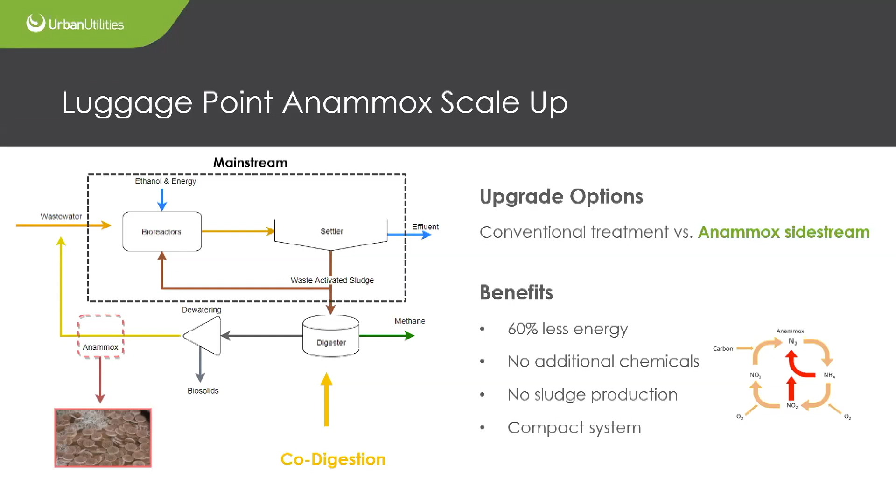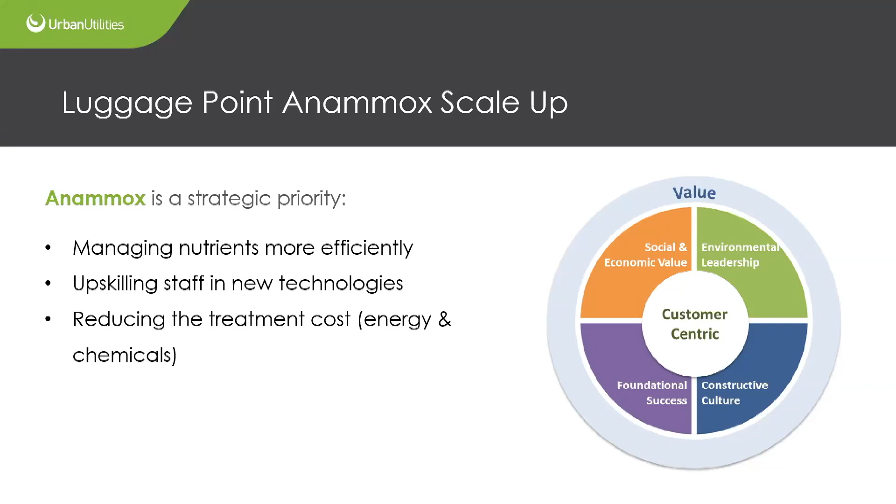Since its selection as part of the upgrade strategy for Luggage Point, this Anammox project has become an important and strategic priority for Urban Utilities as it aligns strongly with our values, supporting our staff by giving them new technologies and upskilling in various technologies. It also gives us the ability to manage our nutrients more efficiently to produce better outcomes for the environment, and by reducing costs we can provide better outcomes for our customers, and add products and services for our commercial customers through that importation of additional co-digestion products.

So where are we at currently? It's been a long process, but we're currently in the process of delivering and installing the ANITA side stream, which is really exciting. I'd like to give you an overview of where we came from and where we're at now.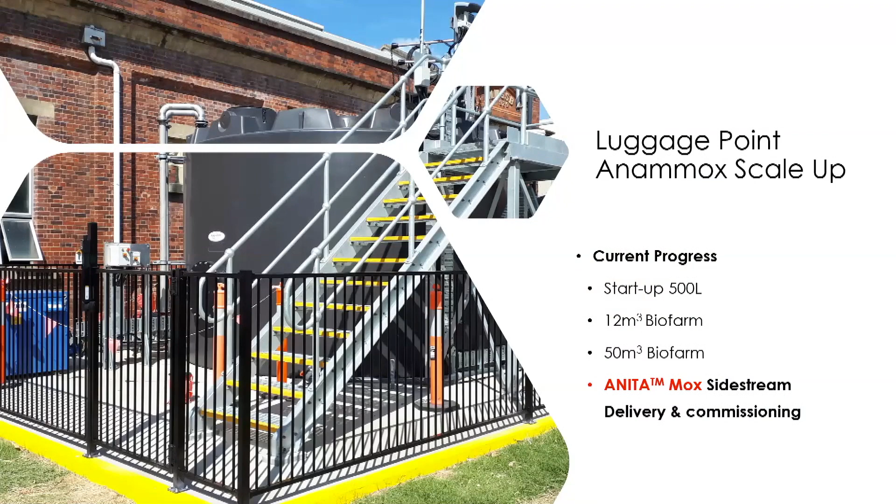As you're all aware, AnammoX is quite a mature process. There's plenty of installations overseas, as has been demonstrated. Unfortunately, the importation of the bacterial sludge into Australia is prohibited due to our strict laws, so our only solution for its implementation was basically to grow our own.

So this all started, the scale-up process all started back about 7 years ago, as part of the Innovation Centre. The Innovation Centre is basically our research centre, where it enables us to partner with technology providers, Veolia being a perfect example, and universities. It really is revolutionizing the way that we do business, and assisting in the uptake of new technologies.

And so through the Innovation Centre and the R&D team, with support from Veolia, we've been heading through this upscaling process, where we started from quite a small amount and worked our way up to provide that viable seed for the full-scale instrumentation installation.

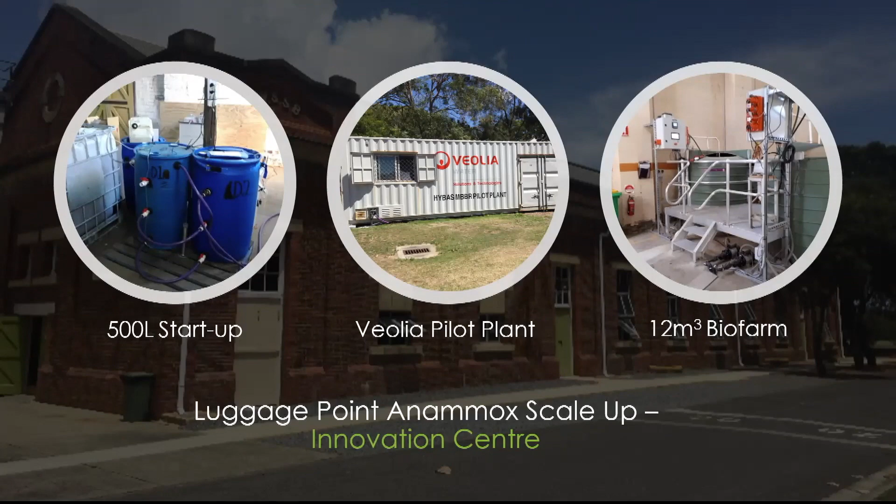Obviously being responsible for growing the bacteria, I also get all the experiences and all the joy that comes with that responsibility, and running the biofarms on an operational plant definitely has its challenges too. I don't think there's a challenge that we haven't been thrown at.

As you can see on the picture there, that's actually the channel where we take the centrate from. Unfortunately, during this upscaling process, we were also upgrading our dewatering system at the same time. So we had plenty of issues with high polymer, high TSS, and mechanical breakdowns, no centrate supply. We basically threw everything at this technology.

While this was challenging, working with an operating plant, it really did give us confidence in the ANITA Mox technology. It built our knowledge and built that really strong connection between our operators, because it's been a really positive experience, both the upskilling within the organization and the better understanding of those process impacts.

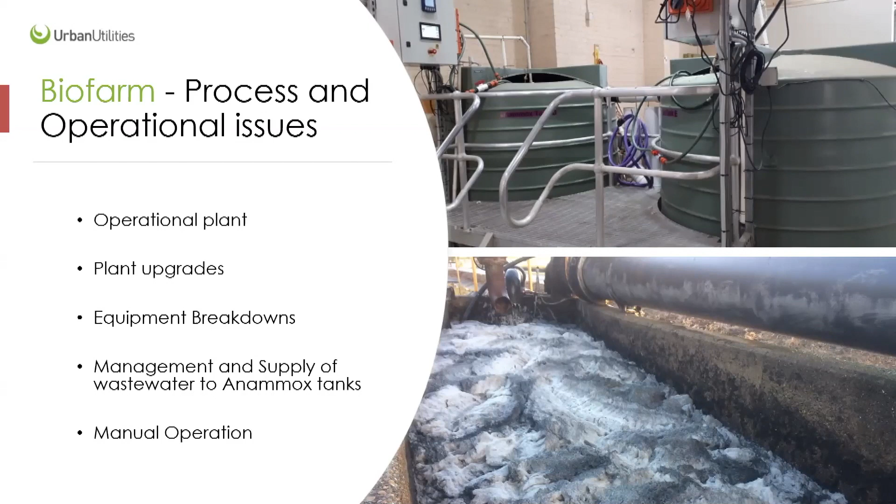So last year we engaged Veolia for the design and construct of the 50 metre cube biofarm. This is the final step in that enrichment process. Fortunately, I had graduate engineers at the time.

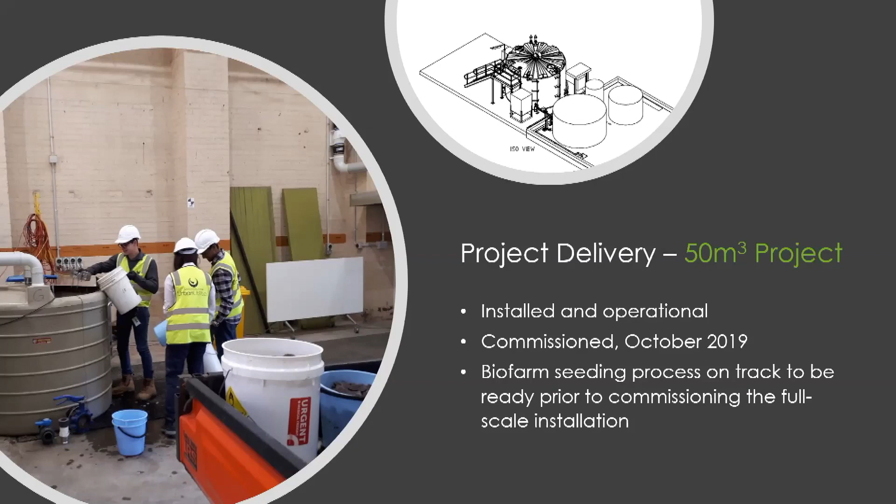They kindly donated their time to help me transfer about 200 buckets, 20 litre buckets of biomass from my previous little biofarm tanks to the 50 cube biofarm. This was fully commissioned in about October last year, and we're currently on track to be fully seeded prior to the commissioning of the full-scale plant.

So the objective of the 50 cube biofarm is essentially to provide sufficient biomass. As you can see from Roman's presentation, the success and the speed of the startup really comes down to having that initial biomass to help with that startup process.

But it's also provided other really good things, such as upskilling the operators, getting them involved with this smaller operation, and trying to build that confidence within the team.

The other thing I forgot to mention was we've been able to look at the operation of the plant under no heating, and also without the need for mixers for that startup period, which we've been able to successfully do.

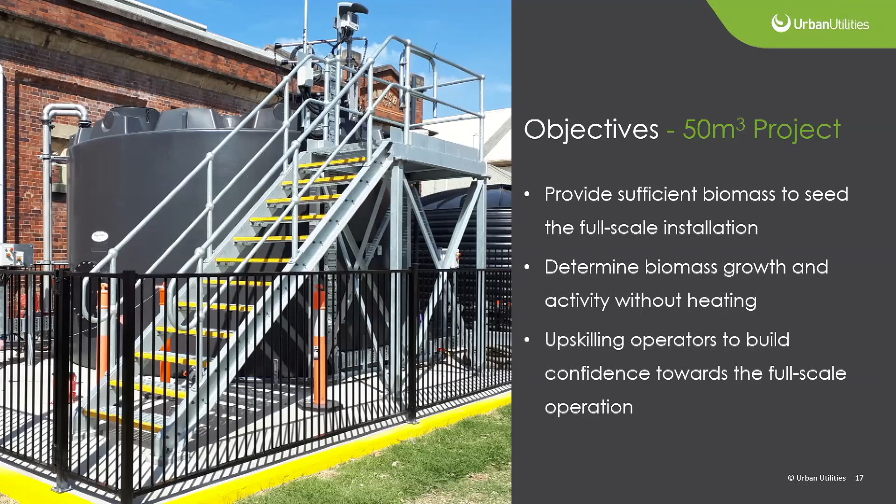So the current operation of the plant: we seeded with about 4 cubic meters of carriers. We're currently at the full loading volume, carrier loading volume, and the plant is reaching loading rates of up to 40 kilograms of nitrogen per day at about 85 to 90% removal.

As you can see, we had quite a rapid startup during the summer months. Unfortunately, during February, we had a big rain event, and essentially the biofarm was fed with rainwater because the centrifuges were turned off and water was being pumped into that centrate tunnel.

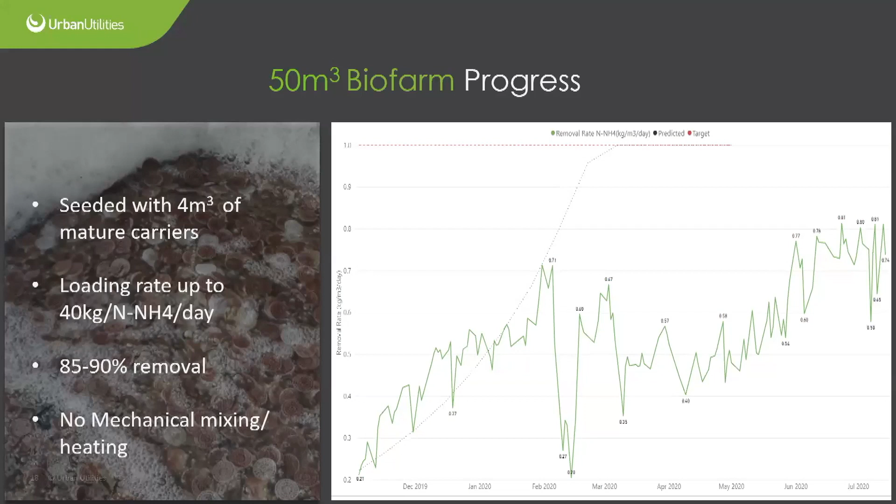This essentially removed all ammonia, so all the food for the bacteria, and it experienced incredibly high DOs for an extended period during the night. But as you can see, it bounced back pretty quick—not as quickly as what we saw during the warmer months, because we don't have heating on this biofarm. But we're basically seeing really good sustained removal rates now, at the end of the seeding process, demonstrating that really good removal rate between 85 and 90% of ammonia.

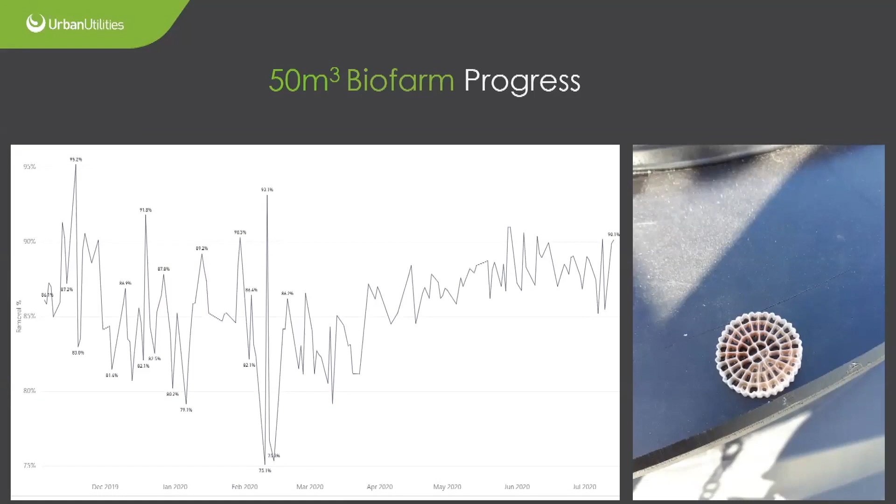So where are we at now? We're currently in the stages of delivery for the ANITA Mox sidestream project. This has been assigned as part of our frameworks, so the design's been finalised, equipment delivered to site recently, and works have commenced for the balance of plant construction with our delivery partners, Fulton Hogan. We're forecasting commissioning at the end of 2020, which is really exciting.

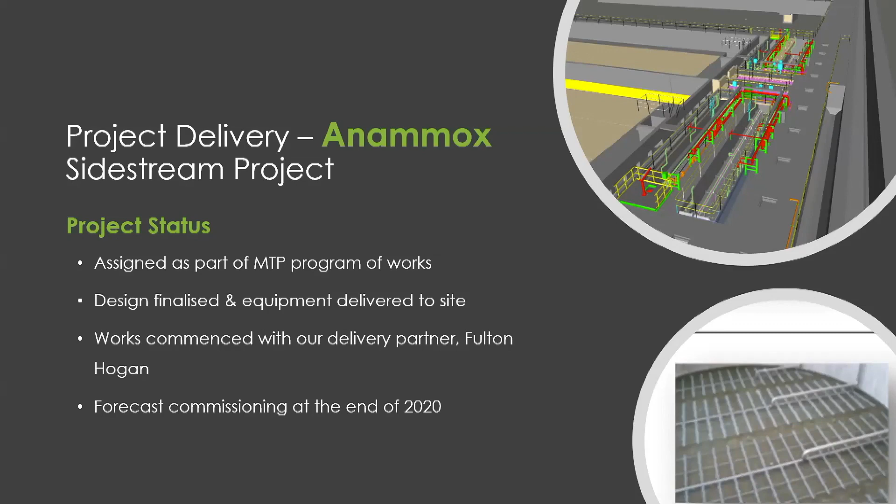The design of the ANITA Mox sidestream involves retrofitting old pre-aeration tanks, which is the benefit of using a carrier-based process—we're able to utilise existing assets. During the design process, we were able to save significant costs by removing mixers and providing no heating, which we've established is perfectly fine for startup and operation with the biofarm. It was really good to work with Veolia.

Veolia provided a really good creative hydraulic design, which allowed the tanks to be run in series, giving greater stability and lower effluent concentration, and really helping with improved startup by seeding the front tanks. Any bacteria that sloughs off then grows within that first tank, allowing it to seed the carriers in the second tank.

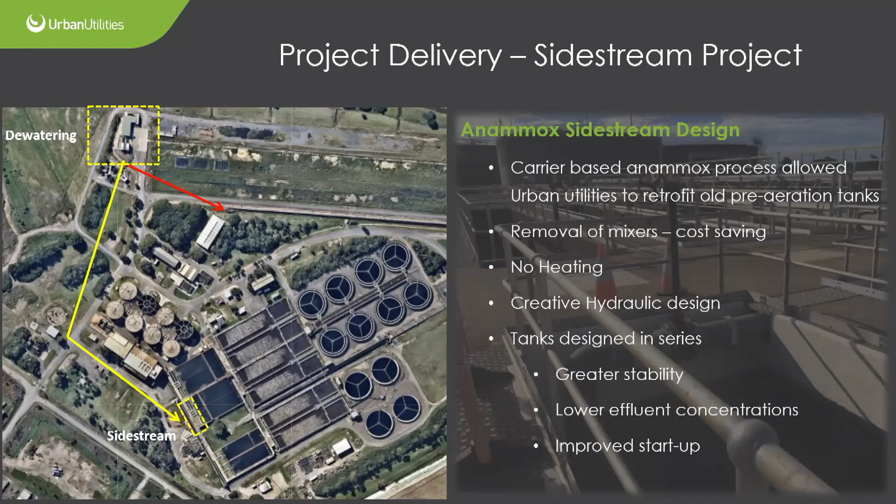For the process design outcome, we're expecting the reactor volume to be about 1 meg, treating just about 1 meg a day. Achieving 85% removal, we should see a massive reduction of 850 kilos of nitrogen per day. This is anticipated to provide significant cost savings of up to $500,000 a year, primarily due to reduced ethanol dosing. The exciting thing is this will also be able to be used as a biofarm to help other utilities if they wish to take up this technology, really helping kickstart their startup process.

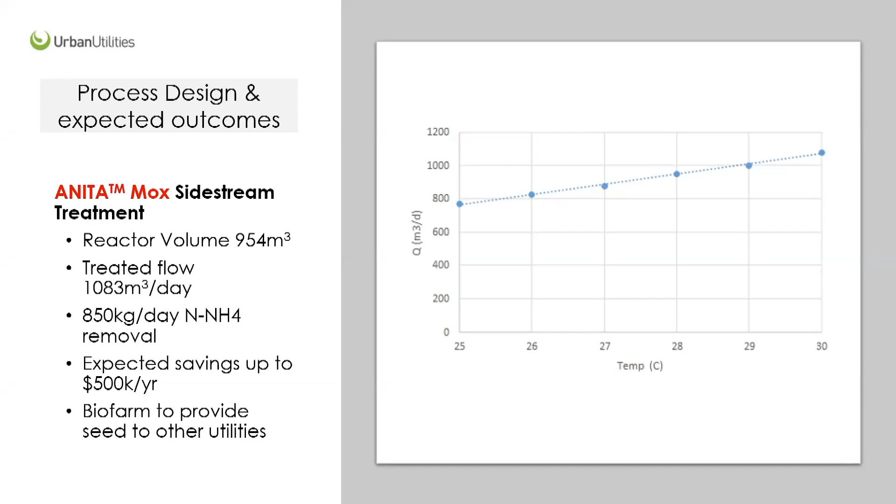So overall, this is a really great project that I'm really happy to be involved in.

Essentially, what Anammox does for us is allow us to utilise existing assets, which enables us to unlock capacity within our plant. It also, because it's a relatively new technology within Australia, gives us better understanding and gives the business confidence to pursue these emerging technologies, which ultimately provides better outcomes for our business, our customers, and the environment.

With that, we should see significant reduction in the cost of treatment. Through this upscaling process, although it's been a long period, it really has supported the development of skills within our organisation, so we should be really confident in running the full-scale installation and realising all the benefits that come from installing an ANITA plant.

Finally, I'd just like to thank everyone that's been involved with the project so far—the research and development team, the operators at Luggage Point, infrastructure delivery and procurement, University Technology, and in particular Veolia Water Technology, who've been really integral to the delivery and support to get this project off the ground.

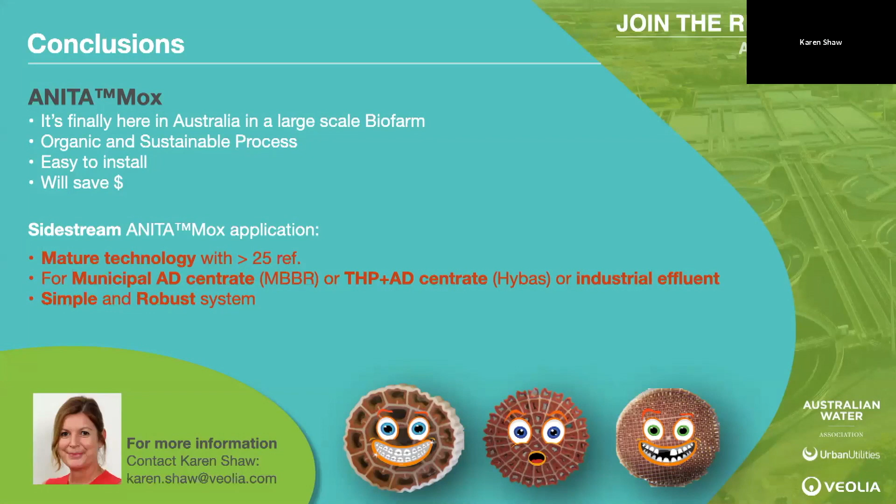So in conclusion, ANITA Mox is finally here. As Justin said, the full-scale treatment plant at Luggage Point will be run as a biofarm, so there'll be seed available for other plants. As I mentioned at the start, and both Romain and Justin have said, it's an organic, sustainable process—so you're going to see a lot of benefits, not just financial, but environmental as well.

It's very easy to install. We really understand what we're doing now, and it makes a lot of financial sense to install at a wastewater treatment plant. So it's really worth looking at.